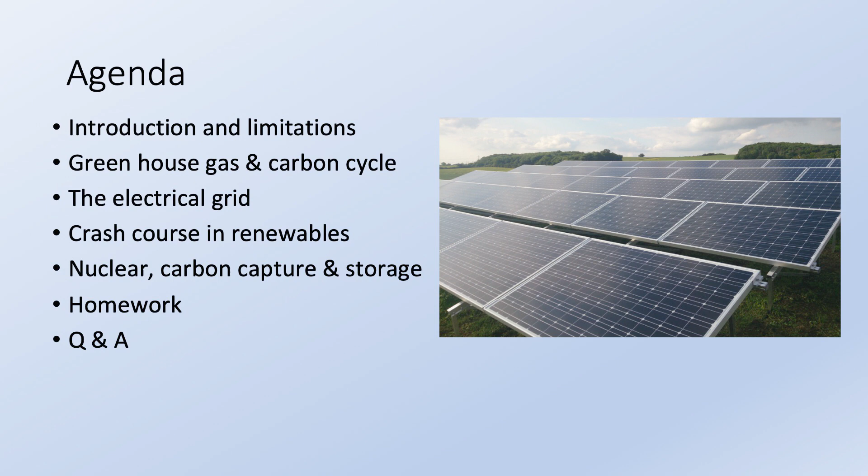So tonight we're going to have an introduction. I'll go through limitations, talk about the greenhouse cycle. We'll have a crash course in renewable energy, all the different types, the main types. We'll talk about nuclear, carbon capture and storage very briefly, and we'll have a Q&A at the end. The main three areas I'll talk a lot more about are going to be solar photovoltaic. It's going to be one of the main technologies in this country and around the world. Also wind. So wind is going to be one of the main technologies, it already is in this country. So I'll talk a lot more about that. And some of the other ones I'm just going to skim through very quickly.

Just to give you a little bit of an idea of my background. I was a surveyor, and about 2004, 2005, I was doing stuff with Friends of the Earth, and I went to the Big Ask campaign, and it was to get the British government to declare a climate emergency. And going to these talks was very influential, and I realised then that the work I was doing, getting people to voluntarily switch off lights, wasn't actually going to be enough, and that the whole world needs to go renewable. So I left my job and started working for a company doing heat pumps.

I realised all the people I was working with didn't actually understand the technology, so I went back to college. I did a master's. It nearly killed me. It was very technical, a lot of engineering, and a lot of things I didn't really understand. I went from a very soft subject to a very hard subject, and I set up a company, and I've worked in solar for several years in the United Kingdom till the British government decided to get rid of all subsidies for solar, subsidies for onshore wind. They closed down Warm Front. There's loads of different things that happened. I won't go into it.

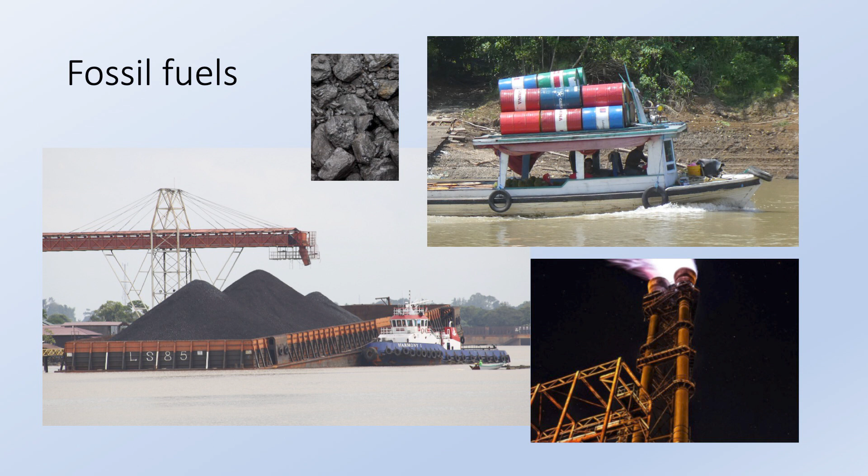These are lovely fossil fuels: coal, oil, gas. Different fuels that you hear of that are fossil fuels will all relate back to one form or the other. What's the problem? Well, the emissions from fossil fuels are literally skyrocketing. We are addicted to hydrocarbons.

The amount of energy that they give us has created the society that we live in. It's created the houses that we have, the cars that we drive. Everything that we've got is owed to hydrocarbons, and we're now understanding the actual costs and the problem of burning fossil fuels. So what we need to do is greatly reduce fossil fuel to pretty much zero. This is the pain that we have to go through.

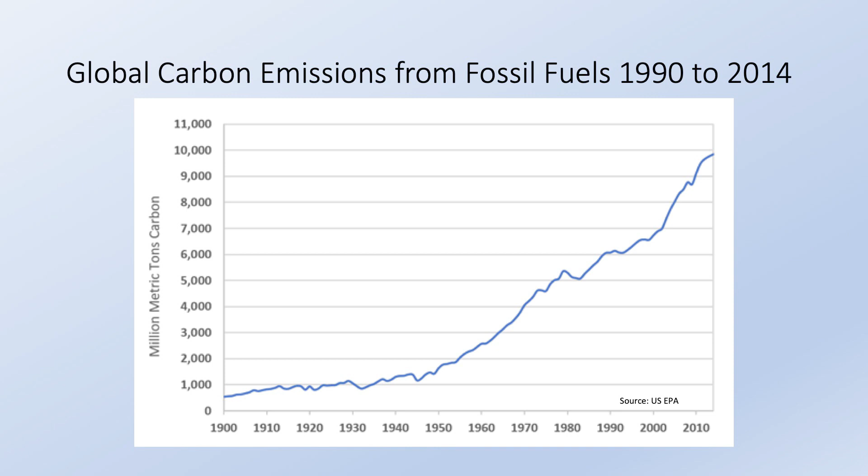We can actually measure in the atmosphere exactly how much carbon dioxide, CO2, is in the atmosphere. We're at now, I think, 416 parts per million. This is like nearly double what it was. CO2 has been constant in the atmosphere for about 3 million years. We know that from taking ice samples, and you can see exactly how much carbon was in the atmosphere.

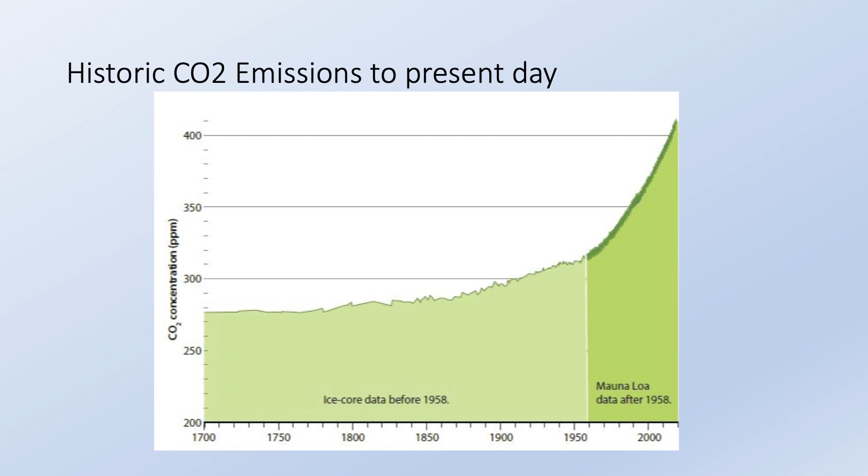And then you can see, trundling along, we hit boom times, we get really good at extraction methods, population explosion, and all of a sudden, it's going through the roof. Not only CO2, but also methane is rising as well, and also F-gases are rising. A quick crash course in the carbon cycle. We've got 2 different carbon cycles: the long carbon cycle and the short carbon cycle.

So the long one is where coal, oil, gas come from, and it can take hundreds of millions of years for coal to form. Over millions of years, it gets sucked out of the atmosphere through trees, all different forms of life, and through millions of years, it compresses and forms fossil fuels. That's why it's called fossil fuels. So what we're doing is we're extracting the fossil fuels and releasing them into our short-term carbon cycle, which is over here.

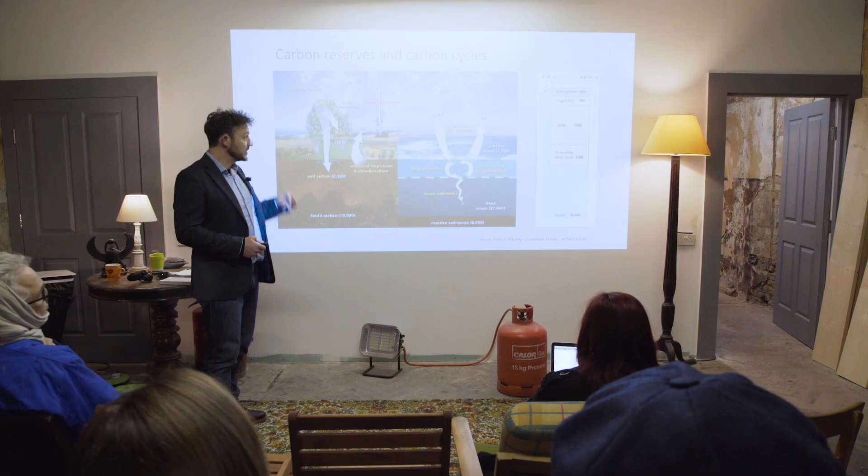So we can measure exactly how much carbon dioxide is in different places. And what's happening is we're upsetting the balance. When we burn fossil fuels, we burn carbon, it goes into the atmosphere, and naturally the oceans, the soils and the forests absorb a vast amount of it, and then there's a little bit left over, and that's what gives us the 416 parts per million. It's increasing ever so slightly to a devastating effect.

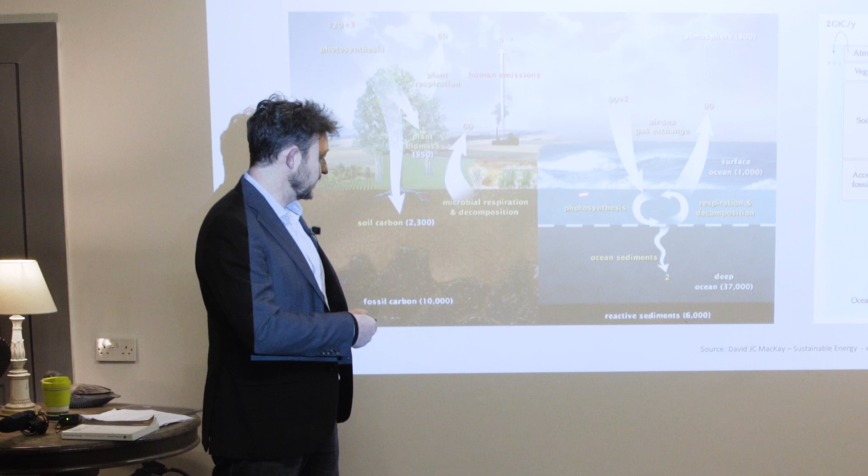Whatever's in the atmosphere, we have this area just here, the near surface of the sea, where it actually balances. So there's a slow cycle that will actually catch up. If you have 416 parts per million, a similar amount ends up here in the near surface. Then in the deep parts of the ocean, it takes hundreds and hundreds of years to filter down. So it's almost like a concrete barrier that it can't go through. And we, as humans, have now upset this natural cycle.

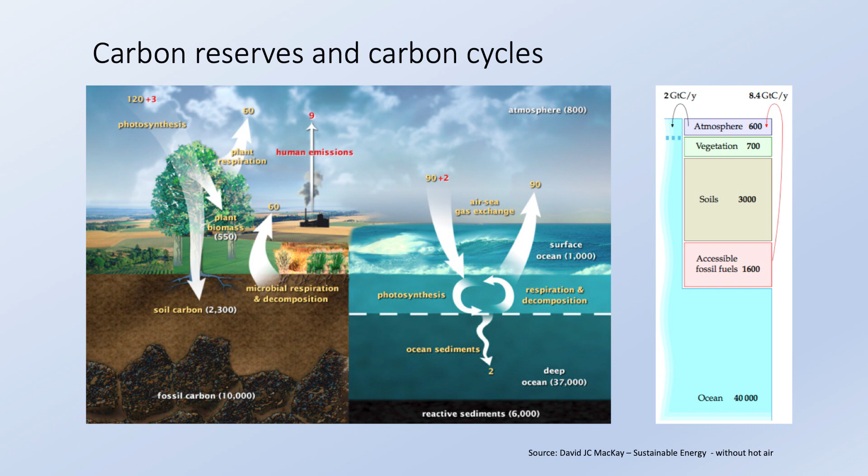So this is why not only do we have to stop burning fossil fuels, we have to figure out ways of decreasing the amount that's actually in the atmosphere. At the moment, our annual emissions, including methane and the other greenhouse gases, are 52 gigatons a year. We could be even increasing it at today's rate. We need to halve it in the next 10 years.

And by mid-century, we have to have totally stopped burning and extracting all forms of fossil fuels. So this is where we need to get to, and this is where we are. The question is, how are we actually going to do it? To give you an idea, at this moment in time, just 4% of the world's energy comes from renewable energy.

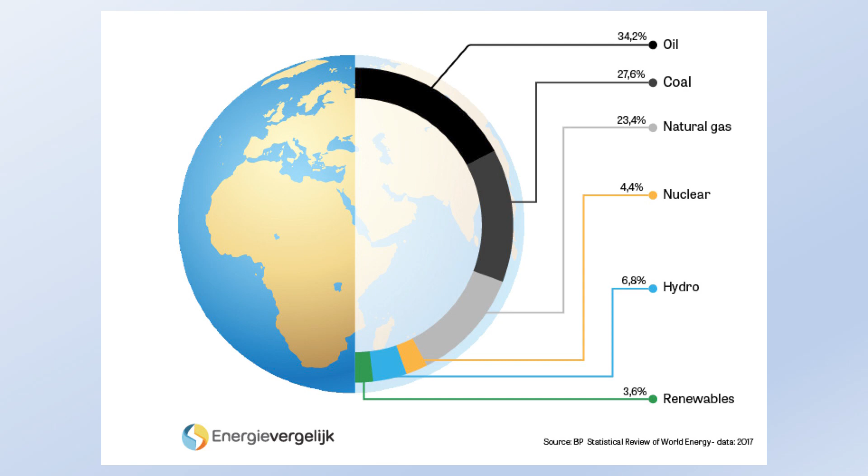We've got another nearly 7% from hydro. It's accounted differently to renewables. It is still renewable energy, but it's counted differently. So if you add this and renewables together and nuclear, it's about 14-15% of the world's total energy demand. So we've got a huge amount of work to do, like an absolutely colossal amount of work. It's just, yeah, it's a little bit scary really.

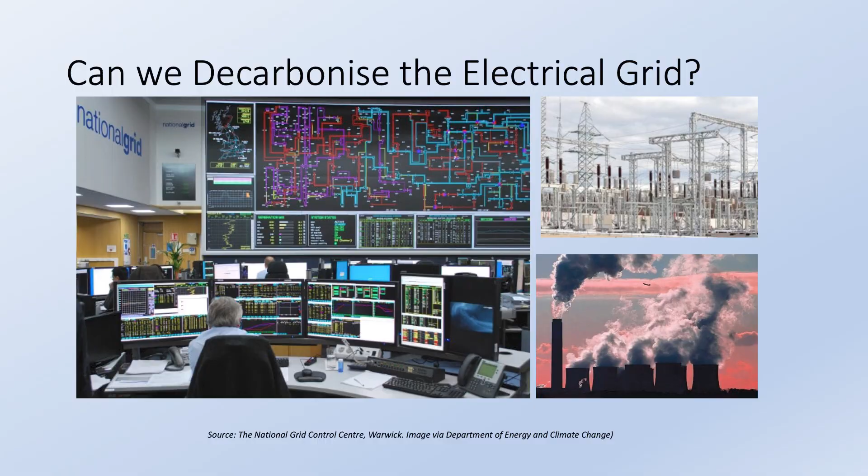So today's talk, I'm focusing on one part of it, which is decarbonising the grid, and it's decarbonising the electrical grid. So we've got several different types of grids. In this country we've got a gas grid where we heat our homes, and we have the electrical grid. All right, so this is a picture of the control room that you have in the National Grid Centre. It's highly complex. You're going to have a big energy source, like a nuclear power plant or a coal fired plant that produces vast amounts of energy.

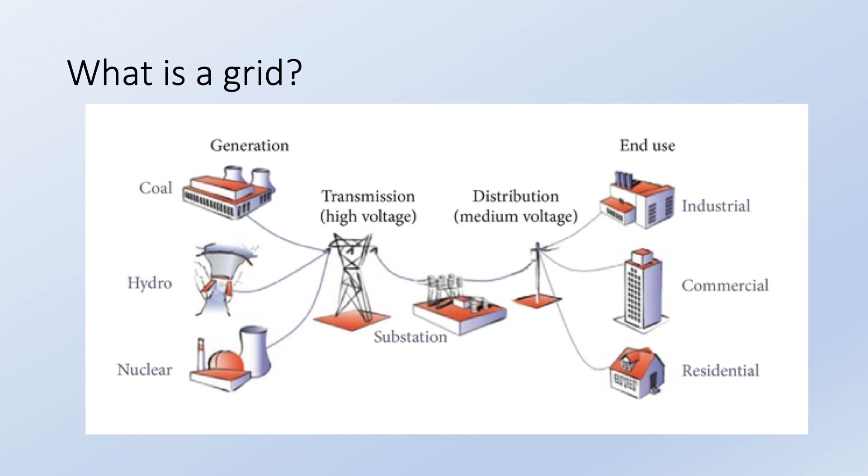Then you have substations, you have transformers that step up the electricity, they step down the electricity, they get it into high voltage so it can travel long distances, and then it gets to your DNO, your local distribution network, and it steps down again into a medium voltage, and then it steps down again into a voltage like 230 volts or 400 volts that you can use in factories and in your houses. So it goes through a process.

While it's going through this process, it uses a lot of energy at the start. There's a lot of wastage around this area. When the energy is getting transmitted, there's also more wastage. And then by the time it gets to us, there's even more wastage because we leave lights switched on. So the whole system itself has huge amounts of wastage to it.

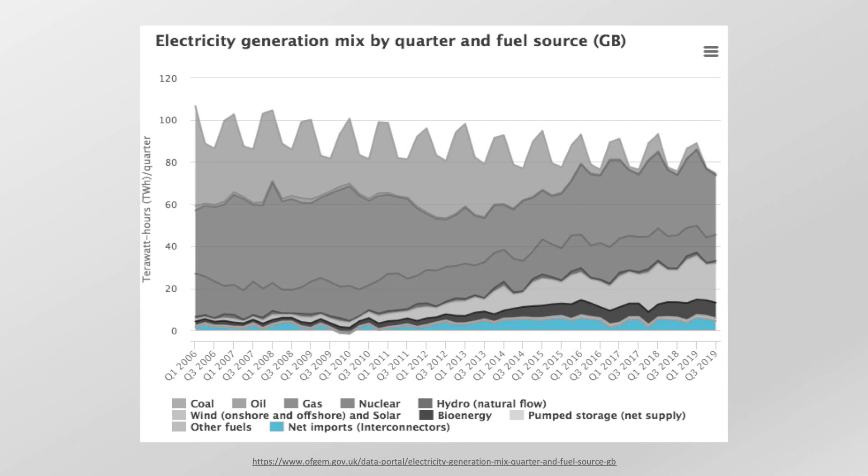And then we've got bioenergy, which is a little bit of a grey area, because a lot of bioenergy in this country is actually waste. So it's energy from waste, but it's counted as a form of energy. And we've got some pump storage, and then we've got interconnectors where we get electricity from France, from Ireland. We get to share the grid, so at peak times we get to have extra amounts of energy.

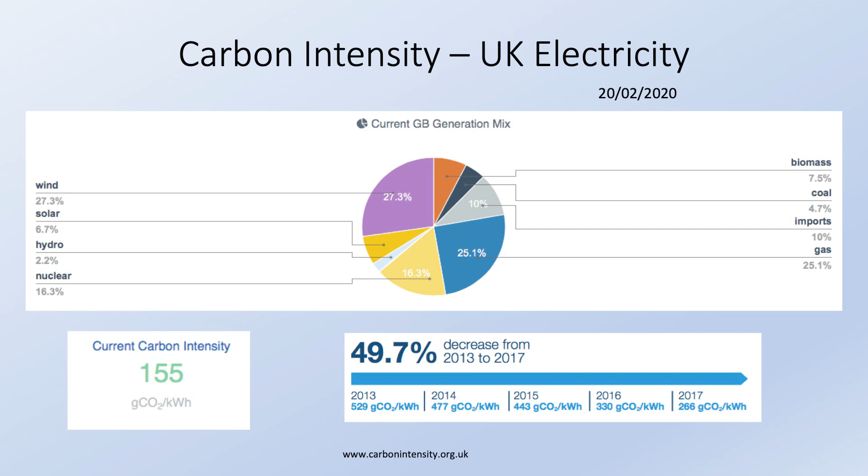Combining 27% and 6-7%, you've got like 34%, so over a third of our electrical grid today was being produced by renewable energy. That's quite good. We've got hydro topping us up a little, nuclear as a base load since it's very hard to switch nuclear plants on and off, some imports through interconnectors, and we've still got coal on our grid, which is quite dirty. The current carbon intensity was 155 grams per kilowatt hour compared to 203, so you can see it varies quite a lot.

You can see we're heading in the right direction for renewable energy, but we're not getting there quick enough. Now I'm going to talk about the different types of renewables. Renewable energy is energy generated by natural resources that can replenish itself quickly, meaning within our lifetime. Some fossil fuels are quick growing, like peat bog.

Peat bog can grow in a couple of hundred years and absorbs lots of carbon. If you burn that, you're not going to hang around waiting a couple of hundred years to replace it.

So the main types we've got are three main sources. We've got this huge ball in the sky called the sun that emits vast amounts of solar radiance. Most of the renewable energy we have comes from the sun.

The other type is geothermal energy, which comes from the core of the Earth. When the Earth was formed 4.5 billion years ago, there were lots of mini nuclear reactors still going on inside it, so you've got all this heat in the crust.

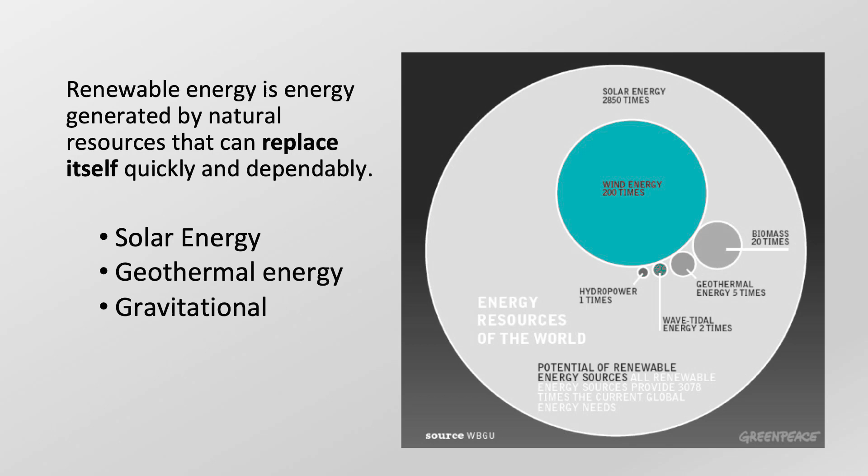And then we get onto wind. There's enough wind to give us 200 times more energy than the whole world needs, which is quite phenomenal. And then we get to solar energy, and we're at 2,850 times.

So within about an hour of solar radiance hitting the Earth, if we could harness that, we could power the whole world. So that's the power of the sun.

The main types we've got are direct solar energy. You've heard of solar panels — that's solar photovoltaic. Solar thermal is also direct energy from the sun, used to heat up hot water. Passive solar is when you've got a nice big south-facing window, and naturally the solar energy will just heat up the room.

Indirect solar energy includes hydropower. What happens is the sun heats up water, the water evaporates, goes over a mountain, cools down, rains, forms a river, flows down, you put a dam up, and then you generate energy from that.

You've also got wind power, which is indirect. The sun heats up the water and the land, creating temperature differences, so cold air moves into warm air, creating a big cycle which generates all the wind. Bioenergy is also from the sun — through photosynthesis, plants grow, you chop the plants and burn them, so that's indirect too.

And then we have the non-solar renewables, deep geothermal, when you go into the core of the Earth and harness the heat from there, and tidal energy.

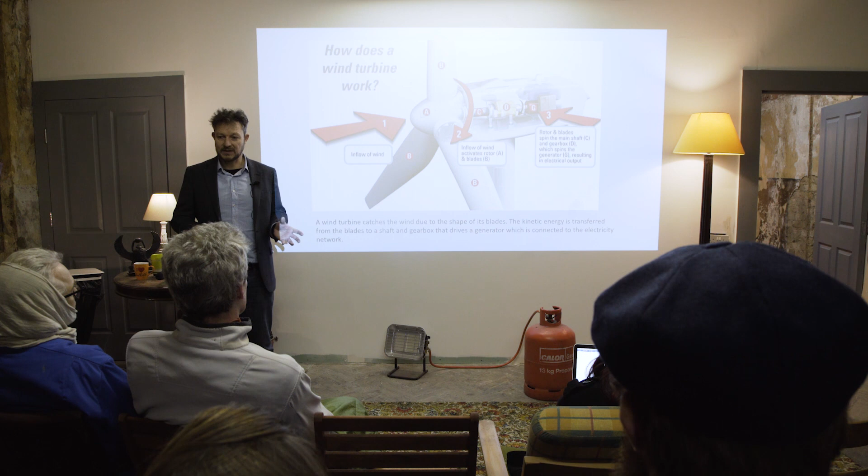How does it work? It works through kinetic energy. We've got now a standard wind turbine: you have a vertical post coming up, with a generator on top, and the standard design now uses 3 blades.

Throughout history, we've had lots of different prototypes, lots of different types of wind machines. We've had ones with 2 blades, ones with 5 blades, ones that have been bladeless, and ones that are curved and can go onto the side of buildings. But pretty much now the standard design going up everywhere is 3 blades, attached to a generator, with a gearbox in between.

The blades are going around between 10 to 20 times a minute. By the time it gets into your generator, this has gone up to about 1,500 to 2,000 revs per minute, spinning like crazy to generate electricity.

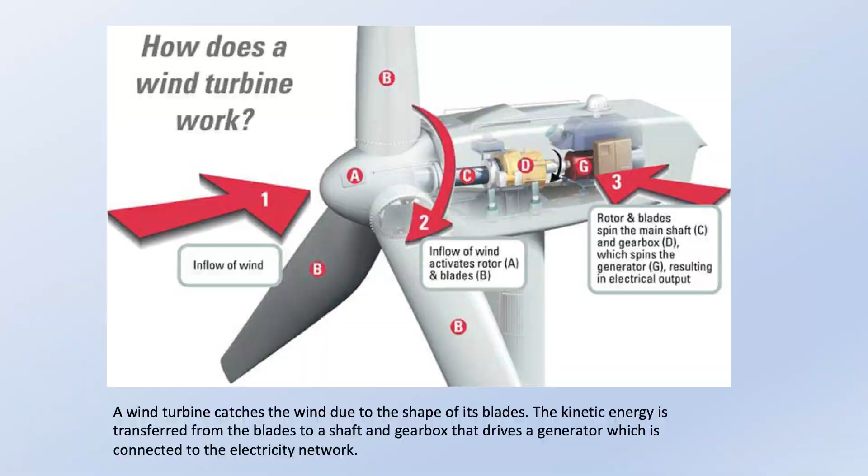What you've also got is a little wind dial at the top that measures the wind speed, so it has to wait for a certain wind speed for the turbine to start working. The modern turbines we have now are actually so large that they draw energy from the grid to start, because of the weight, and they'll start spinning to get up to speed before the wind takes over.

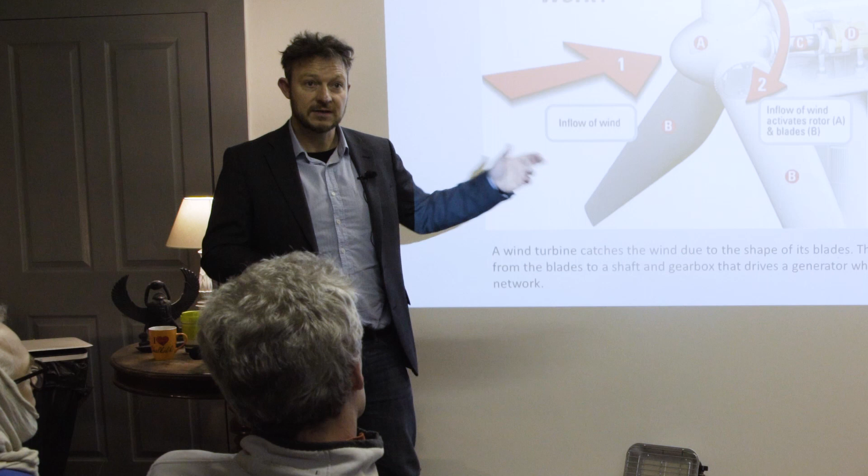What you have is the wind hitting the blade, creating positive and negative pressure. So when the wind turbine is going around, the blades are actually flying like an airplane wing. Positive, negative, you've got some lift going on, and that's the kinetic energy.

Here in the UK is the world leader in offshore wind. The largest wind farm in the world is the London Array. There's another one that's just gone up in the north of England, which is slightly bigger, and there are plans for even more.

To give you an idea of how large the wind turbine blades are going, they're now up to 107 meters in length. They're getting bigger because the bigger the wind turbine, the more energy it catches, and it works on a cubed law: if you double the size of a wind turbine, you quadruple the output. It's also more efficient for the gear levers and cheaper for the cables. Economies of scale - bigger is better.

Offshore wind also gets much smoother wind, so you get better wind quality and better wind speeds. In this country, they like offshore wind because you get fewer people complaining about them. To give you an idea of offshore wind turbine sizes, years ago when I was doing this in Germany, we were looking at 6 megawatt Siemens turbines.

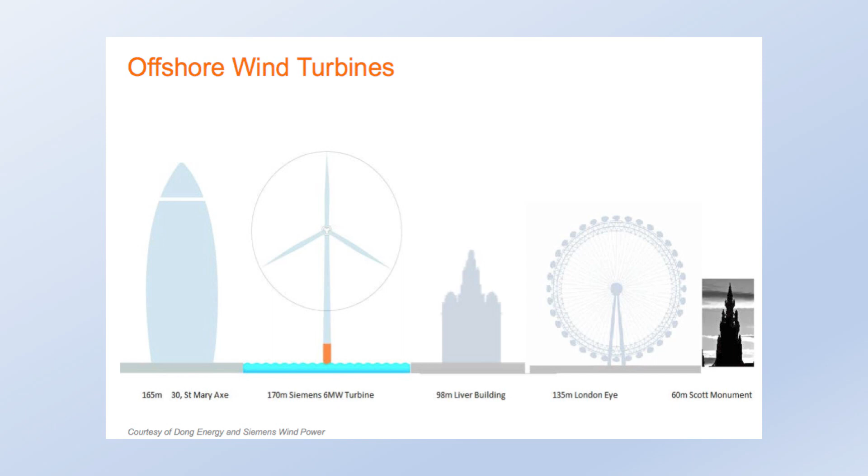They're bigger span than the London Eye. More recently, it's gone from 6 megawatts to 12 megawatts. This is being built in Holland, and you can see here it's not shy of the height of the Eiffel Tower. So between the size of the London Eye and the Eiffel Tower, you got one of these turbines.

Its capacity factor is a lot greater because it can actually work in lower wind speeds, so you actually get more energy from the wind.

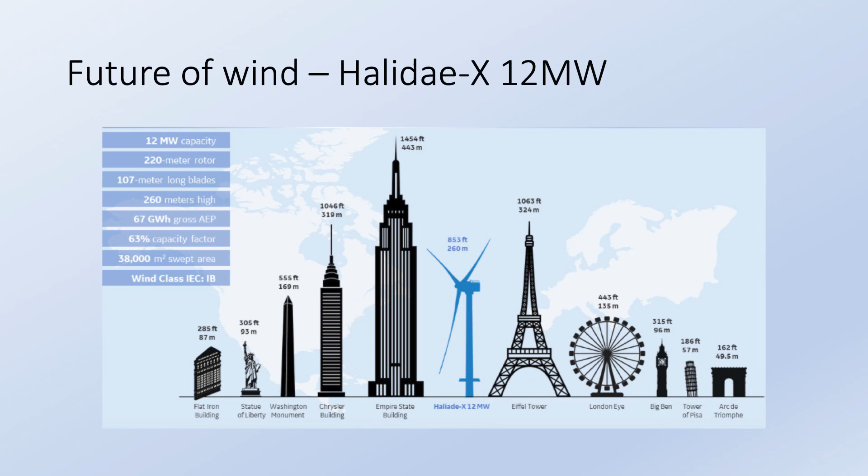The blades themselves on these ones are 107 meters long. They have to have a special coating on them, because the problem is when rain hits them, it hits them at such a speed with the blades going up that they have a special coating on them. And the blades themselves, it takes about 240 people to make one blade.

So this is currently being built, and one turbine is enough energy for 16,000 houses.

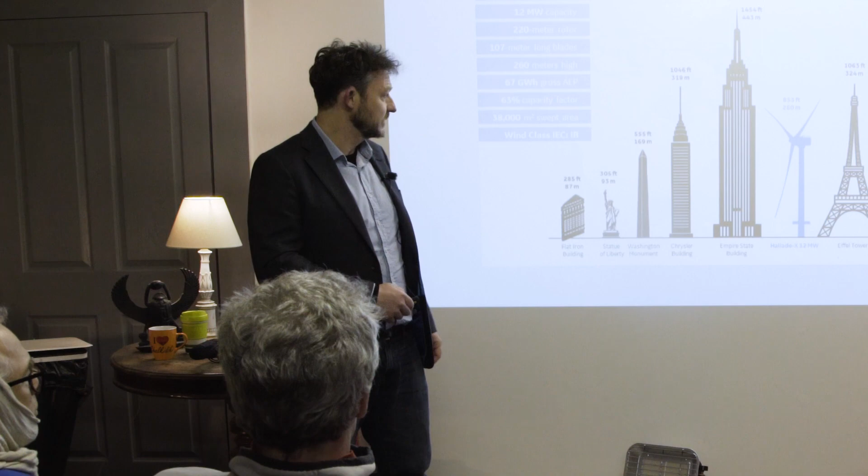More things coming into the future: we're going to have floating wind turbines. The first floating wind turbine farm opened in Scotland last year. It's got 6 turbines. The beauty about floating wind is as you get deeper into the ocean, you need to have more steel, more concrete, more cables, and more costs for actually constructing them.

And then if there's a problem, you have to send a big ship out to try and fix it, which costs a lot of money. If you've got a floating wind turbine, what you do is you unhook it from the seabed, get a ship, bring it back to shore, repair it, and bring it back out again. So floating wind turbines is something in the future that we can see quite a lot more of.

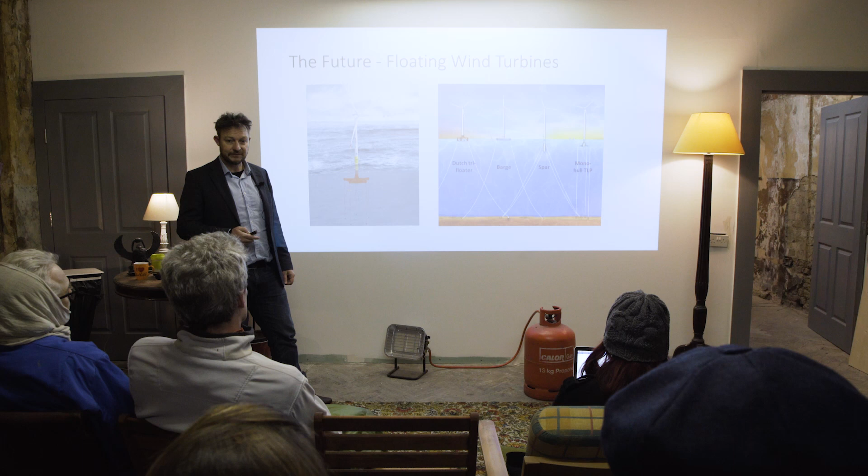We've got different designs going on. A lot of them are based on oil platforms for balancing in the sea. In the North Sea, we've got absolutely grand plans for actually even building an artificial island, with interconnectors between Holland, Norway, UK, France, Belgium, all going together to different countries.

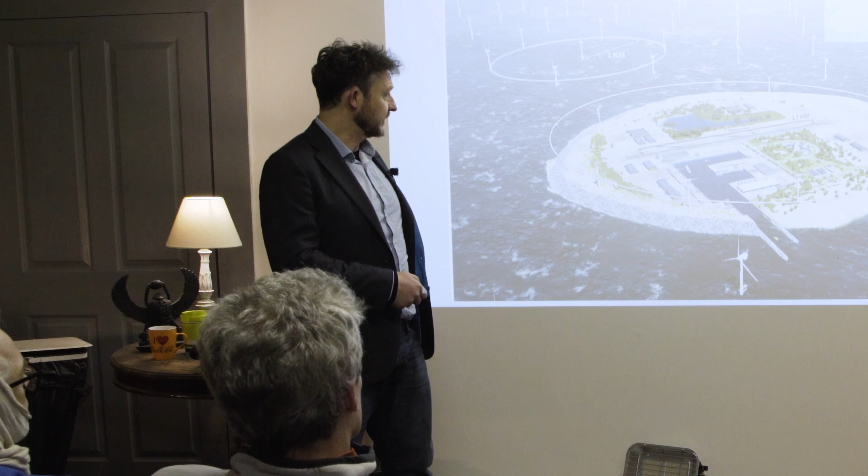The whole idea is to bring the cost down even more. You have a centralized place for all the wind turbines' energy to go, and it brings the cost down. And again, you've also got maintenance for the ships to come in and out, and the workers that can actually live on an island like this.

With the wind potential in the world being enough to power the whole world 200 times over, it is possible. We have the engineering solutions to it. Countries are working very hard on it. Several things we do have to overcome, but they are happening. And it's quite an exciting thing to see.

In this country, again, they got rid of onshore wind. There's people complaining about them. If you've ever heard the term NIMBYs, not in my back yard - people not liking the sight of wind turbines pretty much killed onshore wind, which is a shame because onshore wind is probably about half the price of offshore wind.

Summary, advantages: wind is never going to run out. It's cheap. It provides a lot of jobs, continuous jobs. It stops the reliance on imported energy into the country. And also it's actually a very efficient use of space. If you use wind turbines on land, you can actually still have sheep and farms underneath. It doesn't actually interfere, and you can even have a forest underneath. So wind turbines don't upset land use at all.

Biggest disadvantage to wind is it's an intermittent supply of energy. Over Christmas, over winter periods, you get a lot more wind than you do in the summer. You get more wind at night than during the day. But wind doesn't blow 24 hours a day, so it's an intermittent supply. We can work out an average over a year, or over 10 years, how much energy we get, so we know how much we will expect to generate over 1 year, 5 year, 10 year periods. We can work that out pretty accurately using wind data and wind charts, and they've got wind atlases that tell you how much wind blows in different places. But it is intermittent, so it has to be balanced.

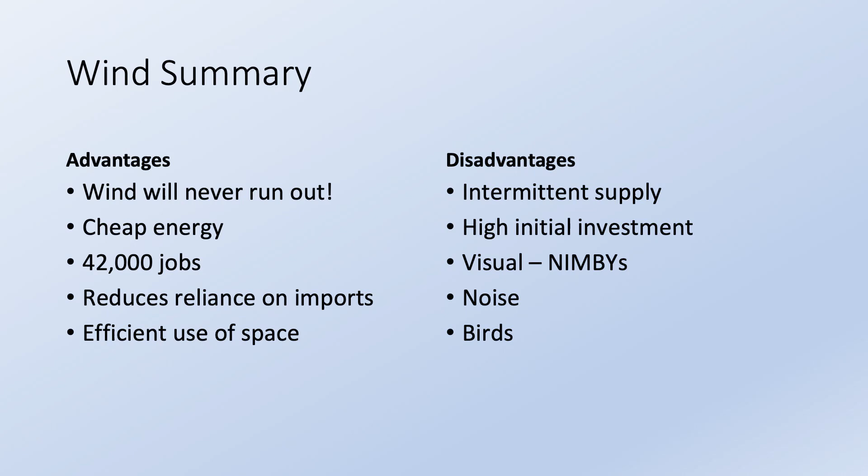There is a problem with birds, but surprisingly, the amount of birds killed by turbines compared to birds killed by cars is outnumbered, something like 50 to 1. So there aren't actually as many birds killed by wind turbines as people think. When designing a wind farm, onshore or offshore, you have to do a study to check where birds migrate, so you won't put a wind farm where there's going to be birds going across.

Silicon is the main ingredient for solar at the moment, which comes from sand, the second most abundant substance in the world. You heat it to a very high temperature and form crystals. Then, over a very slow process, you cut the crystals using almost like a form of thread - it takes about 24 hours to cut one solar cell. Each solar cell is thinner than a human hair. I've got a little sample here you can look at - you can't see exactly how thin it is, but they come in all different shapes and sizes.

Historically, the solar we've got now first came to commercial use in, I think, 1956. It was a 1 watt solar panel used in space to power a radio. NASA and space development have actually been driving modern day solar. Historically, solar has been used by the Chinese and different places around the world for reflecting the sun's power to light fires - that was the first use of solar, known as concentrated solar.

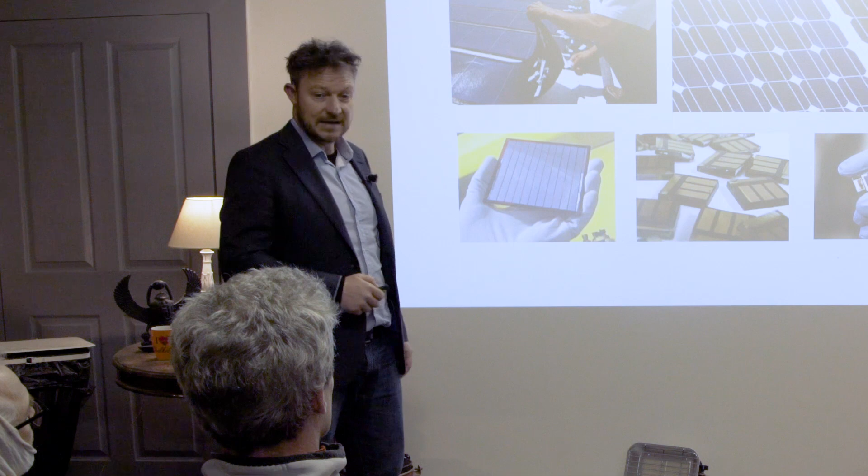Solar technology is exploding - we've got organic solar panels now, and ones that use thin film and monocrystal together, forming a plate to increase efficiency. These ones here are monocrystalline - you can tell they're mono because they're black - and these are polycrystalline. About 95 to 97% of all solar panels you see in the world are going to be one of these two types, and these are the standards. From here, they break down into different variations.

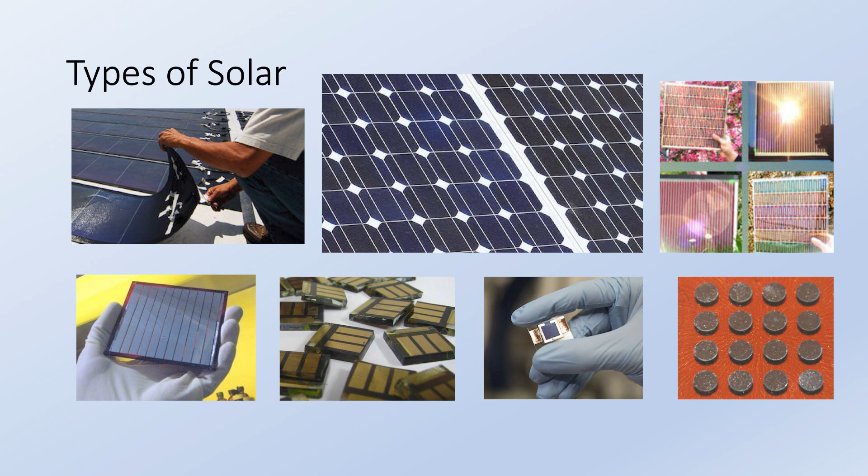We've got bifacial panels that can actually use energy from the backside, from the reflection of the albedo effect on the ground - you can combine them. You've got these ones here, this is thin film, about 100 times thinner than the ones I was just passing around. You've got ones now you can actually print, and you can get dye-sensitized solar cells too.

You can get solar materials you can actually manufacture into clothes. You've got ones that are clear. You can have glass that actually can be a giant solar panel, and you can get paneling that looks like metallic paneling, so the whole building can be solar.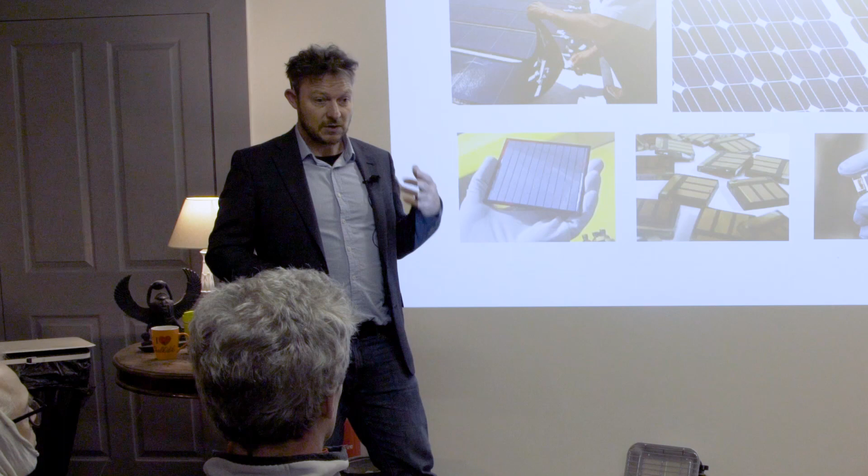Solar is the future, and there are so many developments happening in solar that the price is tumbling every year. Even the projects we're working on at the moment, we put in a quote for a system, and six months later we have to update it because we've been given cheaper, more efficient solar panels from the same manufacturers, now up to 390 watt. When I was installing solar, the first panels we used were 190, 200 watt. So they've nearly doubled in size, the efficiency's gotten better, and they've gotten cheaper every year. The price is just tumbling down.

To give you an idea, since 1977, the earliest example I could find, you're talking about $76 per watt - watt being the unit you measure solar in. By 2015 it's down to 30 cents a watt. So if you work that out, it's about 99.99% cheaper than it was decades ago. The price is just absolutely tumbling.

When I was doing solar, we had the feed-in tariff, which was meant to incentivize people to put solar onto domestic properties, commercial properties, schools, etc. The government kept decreasing it, got the pricing wrong a couple of times, and it crashed the whole industry. But now, for the first time ever, they've had the first unsubsidized solar park go in in the UK. That means the price of electricity produced by solar is cheaper than fossil fuels, which is a game changer. We could see solar becoming the most dominant form of energy in probably about three-quarters of the countries in the world that have higher solar radiance, and it's happening. All we have to do now is figure out clever ways of storing it, with battery storage systems.

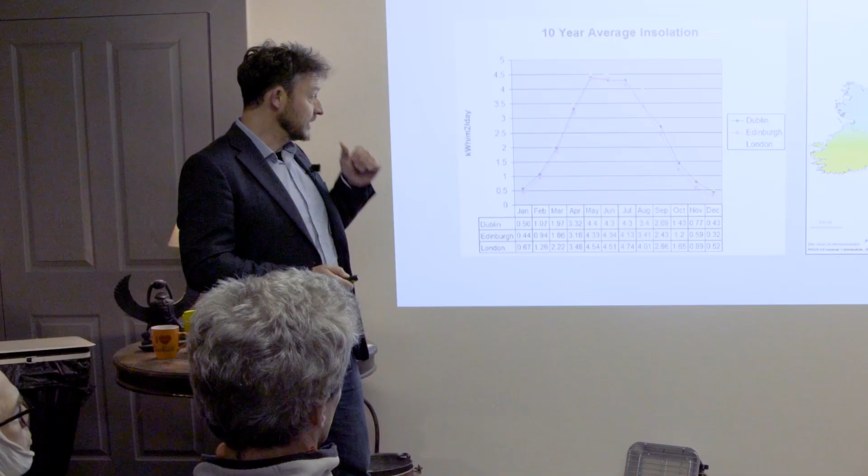What you can do is over-spec the roof so you produce a bit more excess energy in summer, which will flatten out the curve a little. Instead of south-facing panels, you can have east-west facing panels, which will balance the system a lot better. Then if you have a battery system, you can store some of the energy during the day and use it at night to run your television and lights.

A typical system is a house in North London with 12 solar panels, 300 watts each. You can see the solar panels on top - they sit on a mounting system, with DC, direct current, cables coming down from it.

You have a safety switch, isolators, and it goes into the heart of the machine, which is an inverter. So the inverter is the only part of the solar PV system that has any kind of moving parts as such. It has a function. The solar panels themselves are giant semiconductors. They don't actually do anything. There's nothing for them to break. But the inverter, you can expect maybe to change it once every 10 years.

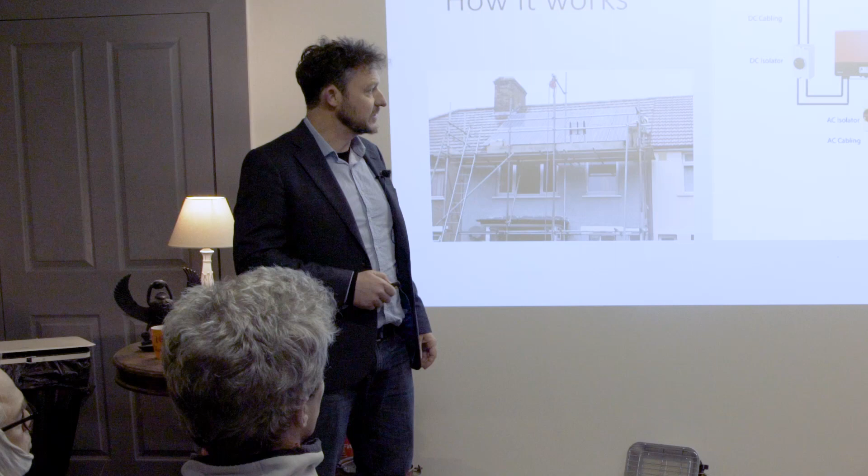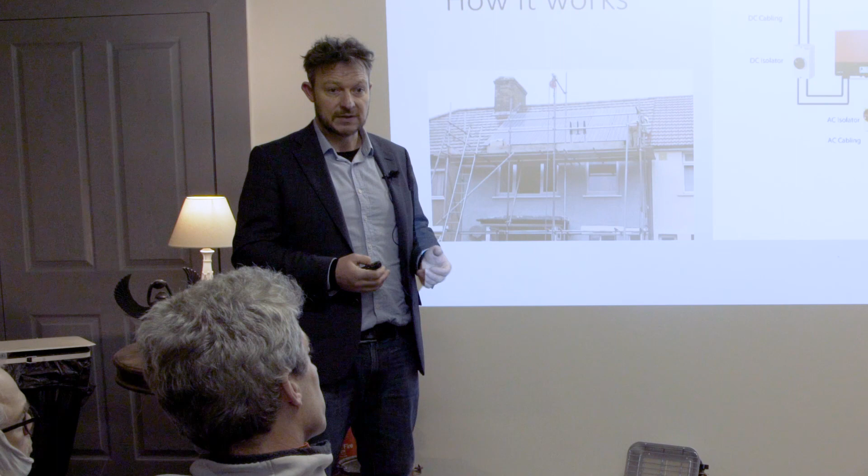And it changes from DC, direct current, into AC, alternating current, and it gets the harmonic frequency. So it gets the frequencies the same. Then it goes into here, the consumer unit, and then you get to use it in your house. Any excess energy goes into the grid.

Future, we've got now concentrated CSP, which is you have literally thousands of mirrors, and what it does, it super concentrates all the sun into one area, into here, to thousands or so degrees. You've got pipes going up and down here to create a vast amount of steam that powers a generator. You can also store the heat from this in molten salts. So then at night you can use the heat to generate more steam to run your turbines, and you can run them 24 hours.

So concentrated CSP gets a way higher output for land use. So what we could be doing in the future would be having CSP units in the Sahara Desert, and then having high voltage DC cabling going to different parts of Europe and the supergrid, and you could actually link everything together, with everything naturally balancing the system.

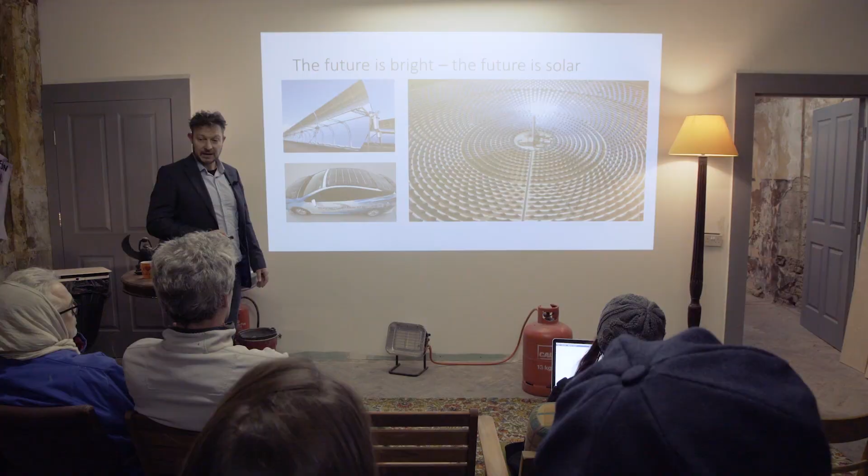This is possible. They're starting to make more concentrated solar plants in different parts of the world, and they actually look amazing as well to see. So this one is in Seville. So if you're ever in Seville, you'll be close to where this is. But you need to have them in very sunny areas. One problem is if a bird gets near it, they actually just fry, they just evaporate because the heat's so high. Parabolic units, what they have is a glycol solution going in here. It gets superheated, and this then goes and drives the turbine. Something similar to this. They use quite a lot of these in the States.

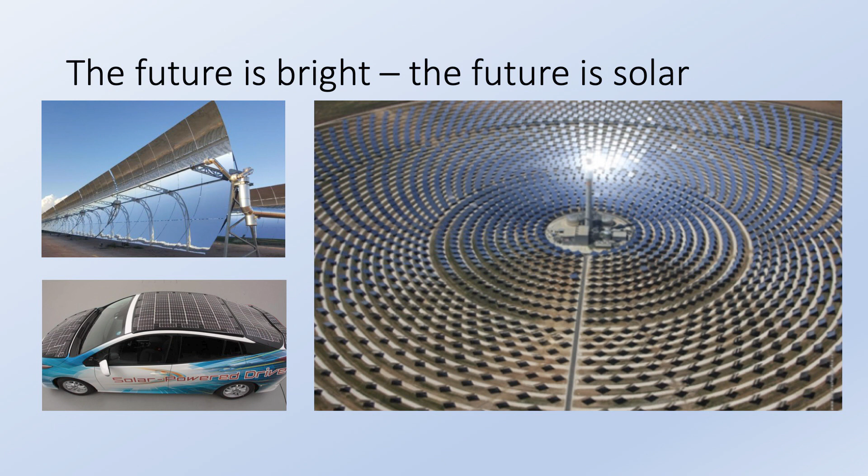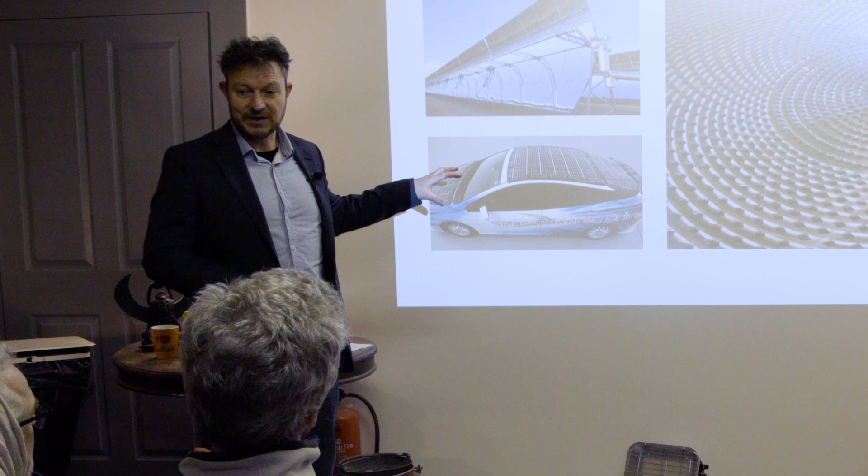We're now moving towards electric vehicles. You can actually have a solar powered car. This is a prototype. If you only drive it about half an hour a day, you can actually get all your energy without even having to plug it in. Technology is moving along very, very quick with solar.

This is a house that we did in Cambridge. It's a zero carbon house. It's got half meter thick walls. We combined an air source heat pump with 10 kilowatts of solar, so 40 solar panels. This building produces enough energy per year, you work out the balance, to run an air source heat pump that heats the whole house. It heats the swimming pool, all the lights. So when you work out the energy balance, it doesn't actually require any energy to run it. It's still connected to the mains grid for winter time. This is where we need to move.

Actually, I wouldn't mind moving here. It's quite a nice house.

Solar panels. We are going to have tens of millions of spent solar panels in the coming years. By 2050, I think about 10% of all the e-waste in the world is going to be solar panels. Knowing that we're going to be dealing with solar waste, we need to be putting in plants to recycle them, and they can be recycled. You have to physically break them down into different components.

Most of the component that goes into a solar panel is glass or glass type. There's a lot of polymers, a lot of plastic goes into it that can be used for waste energy. The copper can be recycled. The silicon itself is about 6-8% of a solar panel. That can be broken down and reformed into making new solar panels. But we need to get the facilities in place.

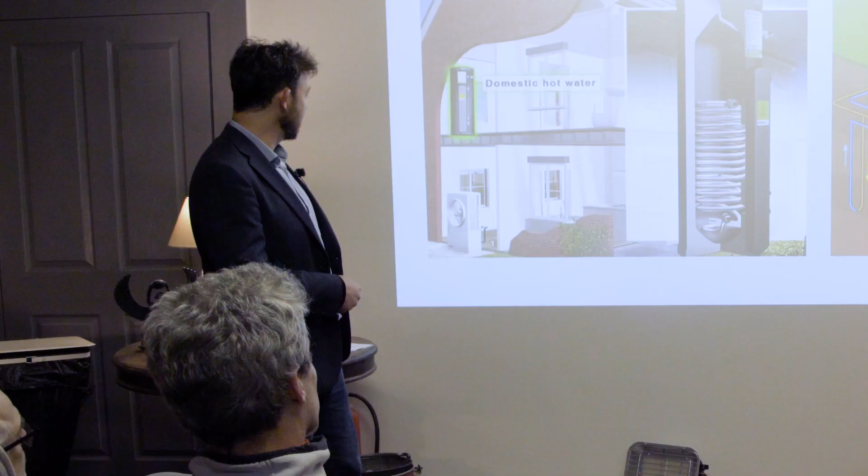And collectors, you've got horizontal, they just go forward and back. You've got slinky, they're kind of in loops. You've got water, you can actually go into a pond, which actually works a lot better, and you've got open loop. And this here is an air source heat pump. It actually gets the energy from the air. So it works on the same principle, but it actually sucks air in, and that's where it gets its latent heat.

So how it works is always very hard to explain. Everybody here probably has a heat pump in their house. It's a fridge. So you stick something into a fridge nice and warm, you close it, you come back several hours later, you open it, you take it out, and hey presto, it's cold. So it's a magic box as well.

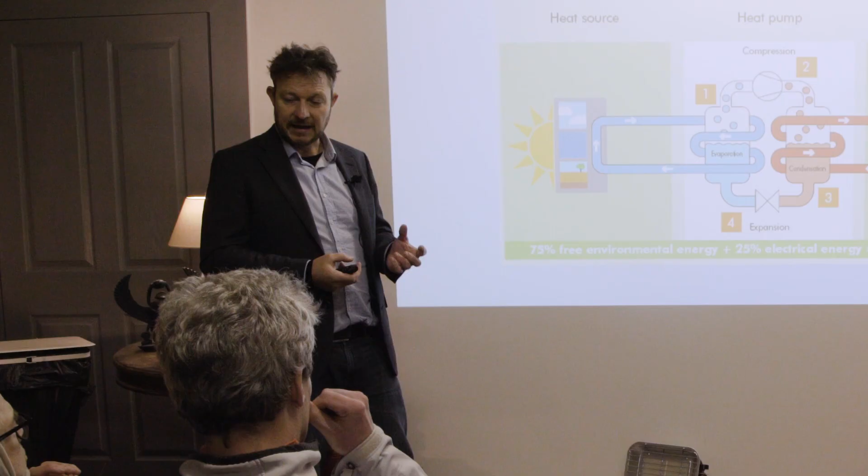How it works, you've got your collectors here, your ground source, water source, and air source collectors, which is this bit here. So it goes out into the environment, it collects a couple of degrees of heat from the air, from water, and then it comes back into the heat pump itself, and it comes in contact with a refrigerant gas, and the refrigerant gas has a boiling temperature of about -27 degrees.

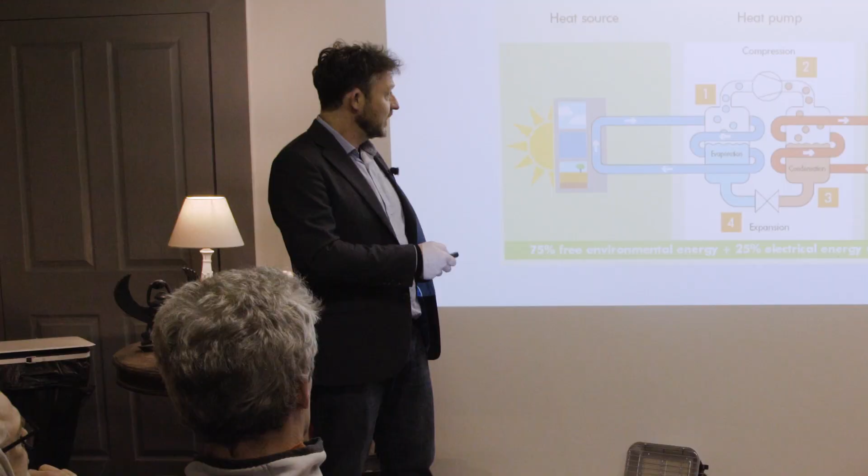And so when it comes in contact, you get a transfer of heat from this loop here, and it goes into the evaporator. When the refrigerant gas heats up from -27, its boiling point, it turns from a liquid into a gas. So you've transferred the energy into the gas, and it goes into a compressor. You need electricity to run the compressor. It spins around and it compresses the gas, and when it compresses the gas, it heats up.

So it's like if you go on a cold day and you get a bicycle pump and you're pumping air, and next thing your hand starts getting warm. So it's Boyle's law. As a gas compresses, it actually heats up, and it heats up to 60, 70 degrees depending on the type of heat pump and depending on the refrigerant gas.

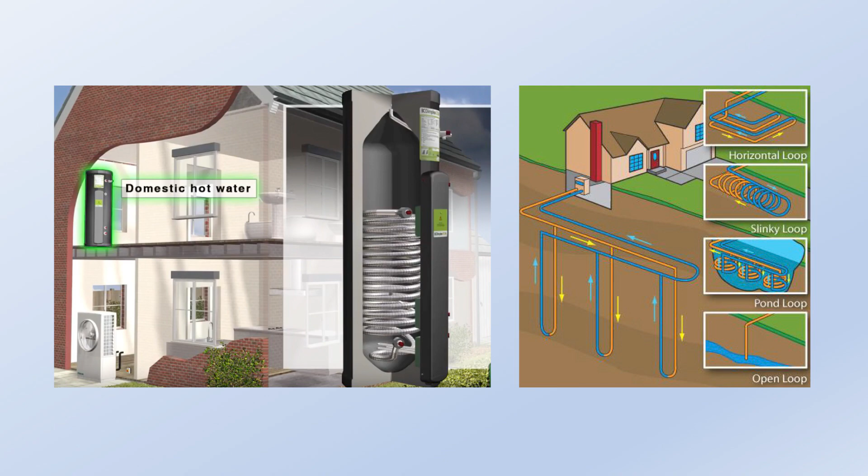Then it goes into a condenser. It expels the heat, so it goes into another heat exchanger. So this part here is a heat exchanger, and it exchanges the heat from the condenser into the distribution system. Going back one slide, that heat then ends up here in a nice big tank. And then your heat distribution system can be underfloor heating.

So if you've got a big area of underfloor heating, you'd have the heat coming out at about 35 Celsius, and then the returning temperature is about 27 Celsius. So it's very low grade heat. So what a heat pump is doing is moving low grade heat, compressing it, and then moving that compressed heat to a different place.

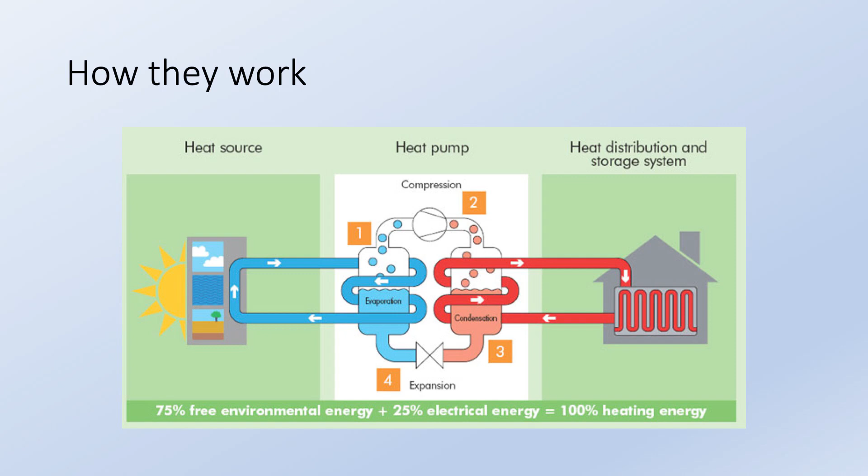So a heat pump is actually a heat transfer machine using refrigerant gases, very, very clever closed loop refrigerant gases. Once the latent heat's been given off, the refrigerant gas cools back down again. It goes into an expansion valve, which then puts it back into the evaporator, and then the cycle continues. So you've got this continuous cycle going on.

So the hard thing about heat pumps is getting the sizing right. If the size is too big, your heat pump is not going to be running very efficiently. If you've got it too small, it's not going to have enough heat to actually heat a building. And then to heat a building, it needs to have a certain amount of air tightness. So if you put a heat pump in here and you've got single glazed windows and a draft coming and going, a heat pump wouldn't be a very efficient way of heating a building like this.

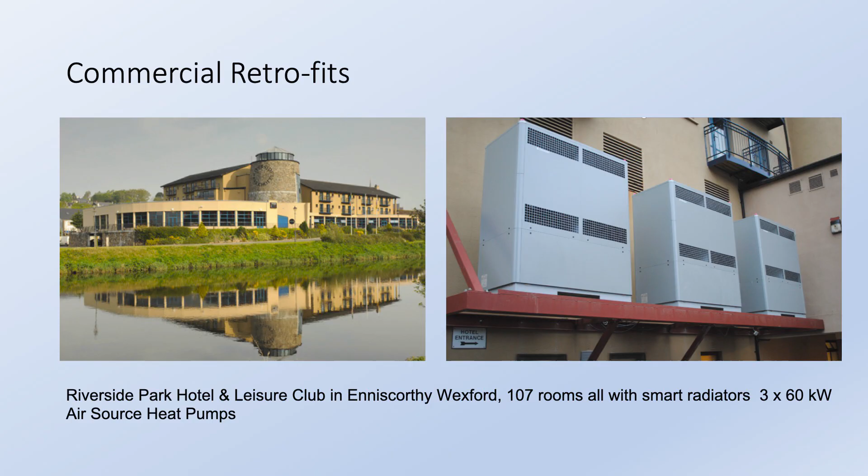So the first thing you need to do is increase the thermal insulation and increase the air tightness. You can retrofit, you can do large scale retrofits. This is a hotel in Wexford in Ireland. It's a 107 bedroom luxury hotel with a spa and swimming pool, and the whole place is run using three 60 kilowatt heat pumps. So you can keep on joining them together to get the energy that you need.

Then in the whole hotel, all the radiators were replaced with smart radiators. They're called smart rads, and they only use about 5% of the liquid that goes into a traditional radiator. And then you've got a fan at the back that gets the heat out of it, so you can get a radiator with like a 35, 40 degree flow temperature to heat a room. It's all very clever stuff.

To give you a comparison to what we're trying to change over from: gas boilers running on natural gas. We need to try and get off natural gas and get onto heat pumps. The problem with heat pumps is they're expensive. The actual units themselves cost a lot of money. To retrofit, you need to put in additional piping, a buffer tank, and a new type of cylinder. So this all costs money compared to a gas boiler.

Once you get a heat pump up and running, its running cost is quite low, because for every kilowatt of electrical energy you put into it, you get 3 to 4 kilowatts of heat energy out. So this is the magic part of a heat pump. The fuel is electricity versus gas. Maintenance, it's like a fridge. How often do you need to fix your fridge? Not very often. Whereas gas boilers break every 8 to 10 years and need to be serviced quite a lot.

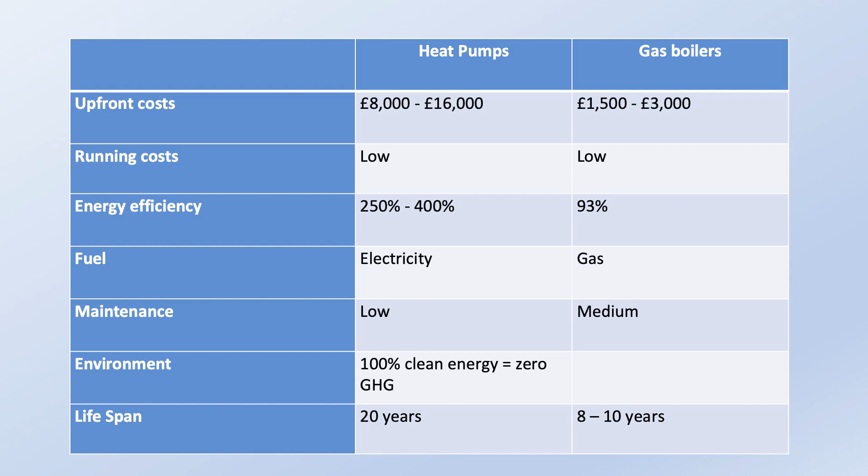If you get clean energy going into them, they're actually 100% carbon neutral. That's why we're relying on heat pumps to meet our future zero carbon Britain. That's air source, water source, ground source, and bivalent systems where we combine one or two technologies to get the best use out of them.

Some of the problems we've got: capital costs. Most buildings in the UK won't be suitable for them because they're not warm enough. They need to have their energy efficiency improved first. The design is a big problem. You can't just rip out a gas boiler and stick in a heat pump. You have to do heat loss calculations, which cost a lot of time and money.

There are limitations on the grid as well. If you put in a big commercial heat pump, it needs a certain amount of energy to get it started. So moving to the future, we're going to have to look at increasing the grid capacity for heat pumps and also for electric vehicles.

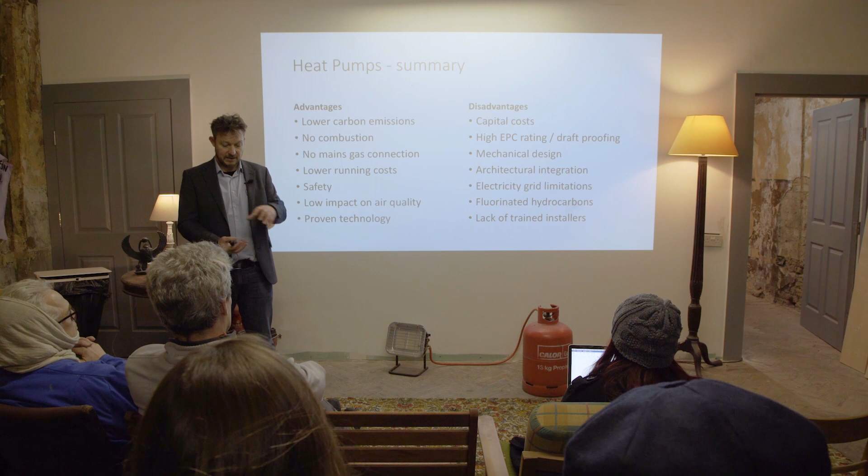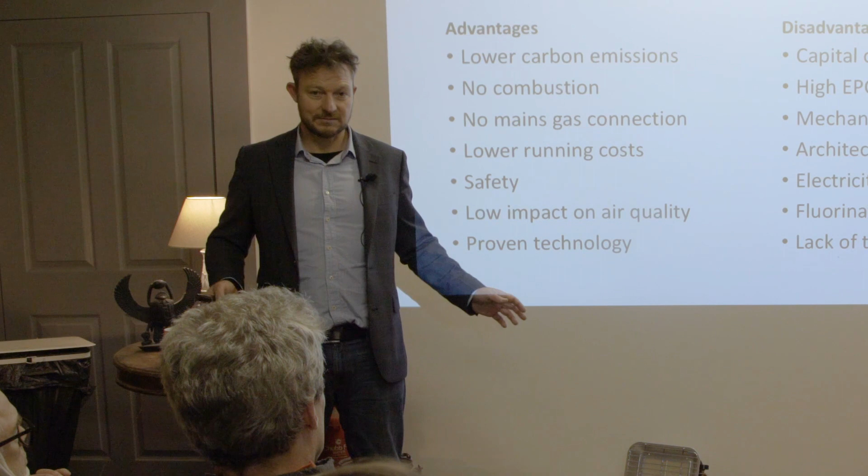Another big problem that most people don't know about is the F-gas that we talked about. Most heat pumps have a small amount of F-gas in them, which is 23,000 times more potent than CO2. If anything happens and it gets into the atmosphere, you've ruined the advantage of having a heat pump.

The other biggest problem we have is lack of trained installers. We've had subcontractors coming in who put buffer tanks on the outside, which means the heat pump's never going to work. We've gone to places where traditional plumbers have plumbed the system as you would radiators, and it's not going to work. So a lot of design and thought needs to go into them.

If you get it wrong with a ground source heat pump, it can extract so much energy from the ground that it actually physically freezes the ground. Get it wrong the other way, and you've got a machine that's not running very efficiently. But once it's up and running, there's no maintenance cost, they last a very long time, proven technology, they're very safe, and there's no combustion going on inside them.

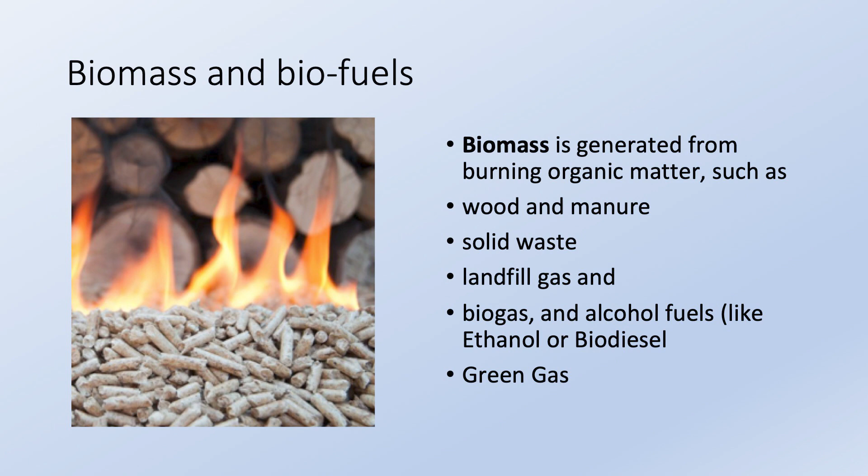Biofuels, biomass, biogas - we use a lot of these in this country. Solid waste, we burn rubbish, it's not a very good source of energy. We've also produced fuels from biogases as well. In the future, quite a lot of the UK energy mix is looking at using biogases and biofuels, so it's a technology we need to keep an eye on.

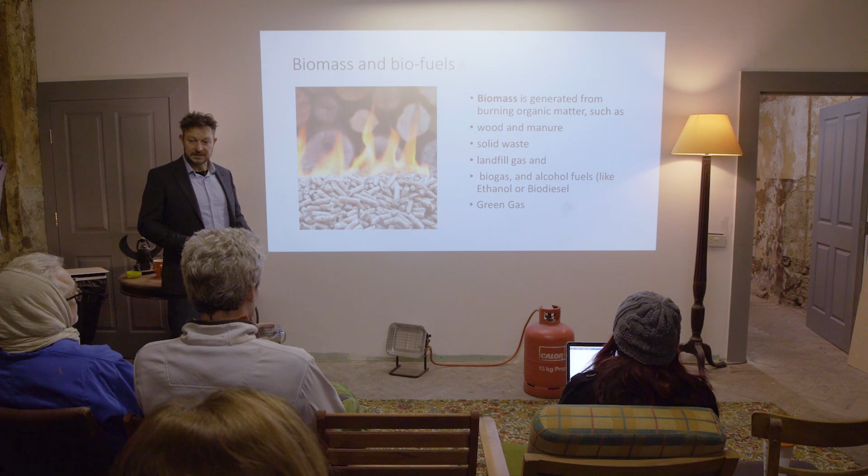One of the things is anything produces waste, it produces methane, or it produces carbon dioxide. It's part of a carbon cycle. It's claimed to be carbon neutral. In the olden days, the whole world was carbon neutral - people would chop down a tree, light a fire, cook, and a couple of years later, 20 or 30 years later, a tree grows back and they cut it down again.

Now we've got a huge population in the world. We haven't got enough trees, we haven't got enough biomass - it's not the answer. In this country, some power stations like Drax converted to biomass, and they were actually importing wood from America. A lot of the wood they were importing turned out not to be as sustainable as they were claiming, and once you work out the true carbon cost, it wasn't actually as green as people claimed. If used correctly with certain types of rotational crops, it can work brilliantly. If you do it wrong, it's adding to the problem of the environment.

Quite simply, you've got different wood fuels. You've got rubbish, which we use a lot of in this country - we're actually building more incinerators, which I'm totally opposed to. You've got alcoholic fuels, you've got crops - Miscanthus is a very fast rotational crop. In Zero Carbon Britain, produced by CAT, they talk about changing land use and using fast rotational crops, which seem to work quite well.

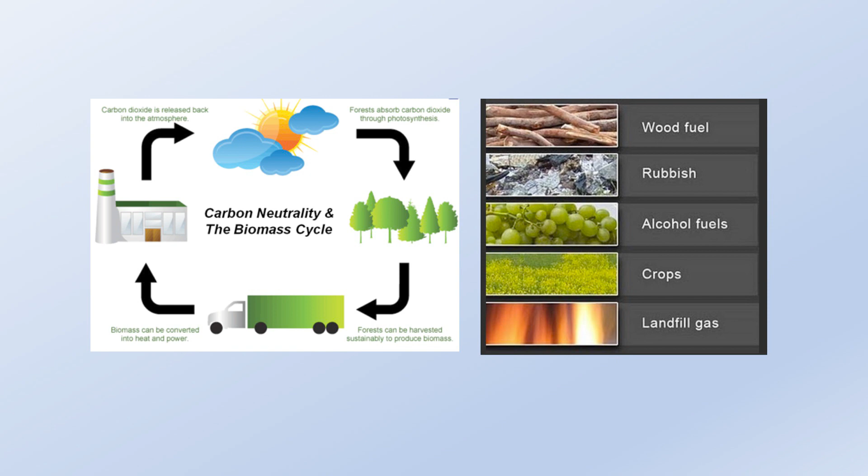Also you've got biogas produced by landfill and methane - they stick pipes down and extract the methane and burn it. Used correctly in a lot of countries, it's great because it gives off a vast amount of heat. You inject some air to the back of it, and it super burns the emissions, and then you can put scrubbers on the waste air coming out, which cleans it up as well. Done right, it's quite good. Not done correctly, it's absolutely awful.

In countries like Israel, it's actually compulsory to have solar thermal. You go to Greece or Spain, and they've got nice simple ones where they've got the collector and the tank sitting right beside it - nice and simple, it heats your hot water throughout the day, and then you get to use it. More modern ones, you can actually use these to preheat hot water for a heating system.

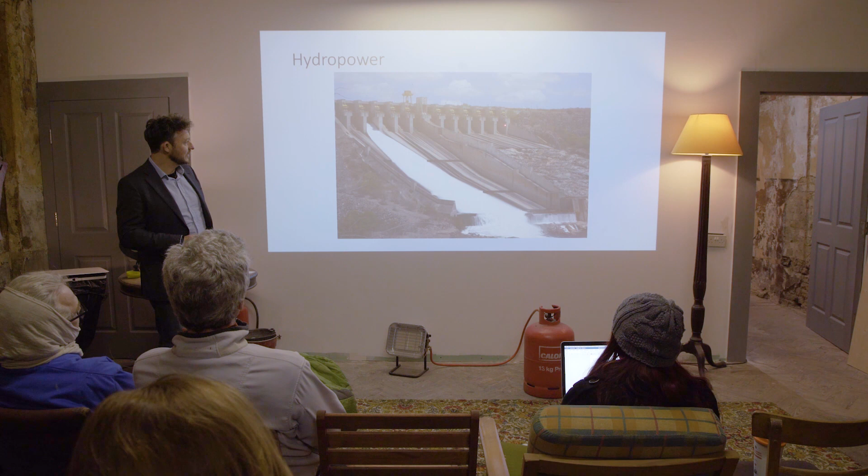This is a place I went to in Brazil - I think it's the second largest hydro plant. You can see all these units here, and only one of them is open. The reason being, this whole hydro plant damming the San Francisco River in northeast Brazil is running at 22% capacity because of drought. In Brazil, they're having huge energy problems because of changing rainfall patterns, and they've relied so much on hydro that it's now proving unreliable.

But once they're up and running, they produce a vast amount of energy, but also a vast amount of problems. How it works is quite simple - you've got three different types. One is you dam the water, physically block it, it builds up an artificial lake, and then you've got a controller you can open and close. The intake comes in with the pressure of water, goes into a turbine, and drives a big massive generator.

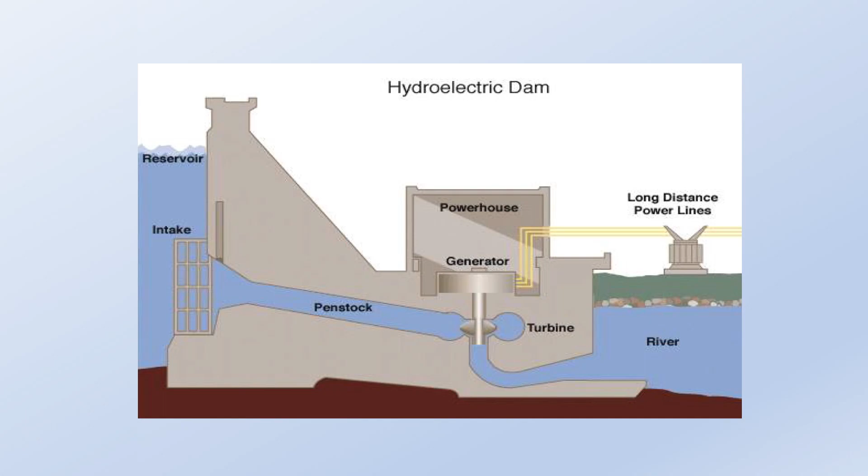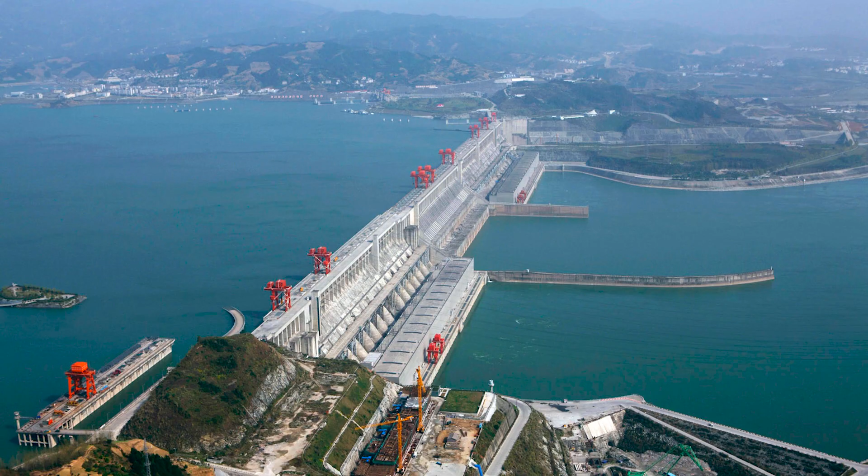These turbines can be 3 to 5 meters across, absolutely huge, and they produce a vast amount of energy. The biggest power plant in the world is the Three Gorges Dam in China. It's so big that they had to rehouse over 1 million people.

Vast amount of destruction. It dams so much water that it has actually slowed down the rotation of the Earth by about a nanosecond - it's like an ice skater. When an ice skater is spinning with their hands out, they go slow, and when they pull their hands in, they go quicker. So literally they've shifted that much water that it's affected the Earth's rotation.

So you've got three different types: impounded, run-of-the-river, and pumped storage are the main three. And then you've also got micro hydro, which actually works quite well on small rivers.

A big problem with hydro - if you've got a drought, they're not going to work very well. There's also huge environmental damage in hot regions because dammed water stops debris and silt from moving, and it builds up. This forms methane - a vast amount of methane is actually released from hydro plants, so much so that the IPCC is going to change how it accounts for hydro, which is why it's counted differently to other renewable technologies. There's also huge damage to fish stock and population.

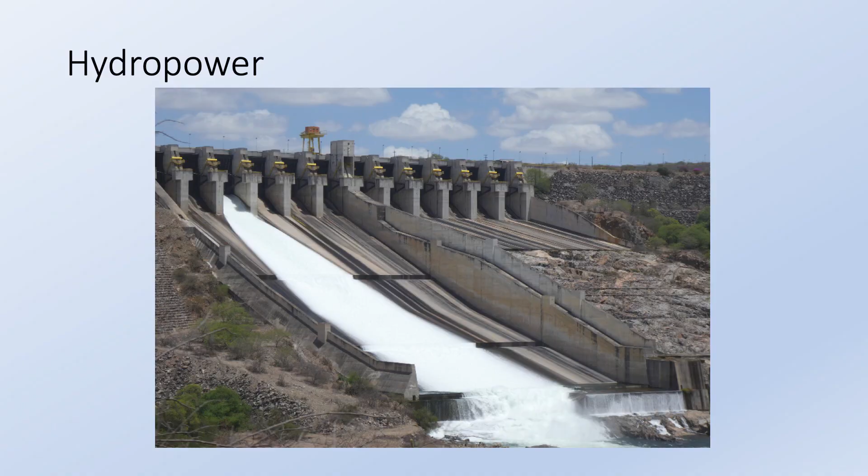And then there's the building of it as well - some of the latest dams Brazil wants to build involve literally destroying vast areas of pristine rainforest and using vast amounts of concrete. Amazing technology - it produces more renewable energy at the moment than any other technology in the world, but we're still coming of age in how we actually use it.

The preferred technology is run-of-the-river, where you don't dam a whole river. Instead, you dam or siphon off a part of it and redirect that to generate electricity without upsetting the rest of the river flow.

Tidal energy - absolutely amazing.

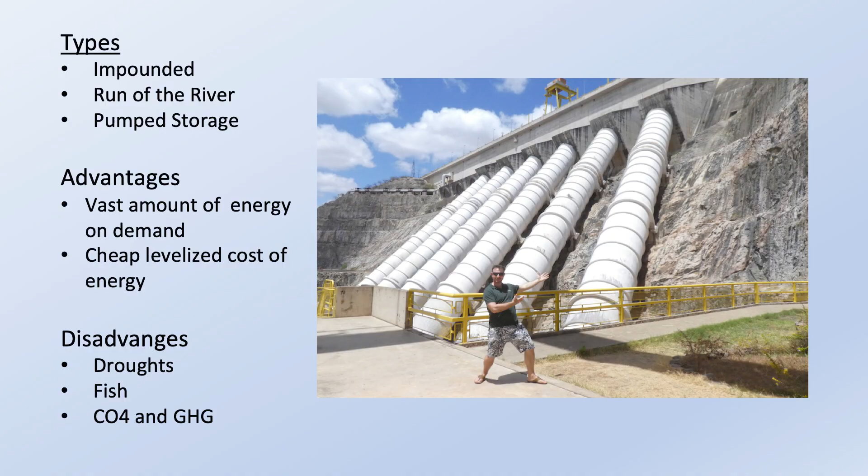Every day the tides rise and fall in this country and everywhere around the world. It's predictable, moving vast amounts of energy. Seawater is 832 times denser than air, so it's got over 800 times more energy in it.

With tidal, you've got 3 different types. You've got tidal streams, which is very similar to hydro, same types of turbines. You've got tidal barrages, and then you've got tidal lagoons.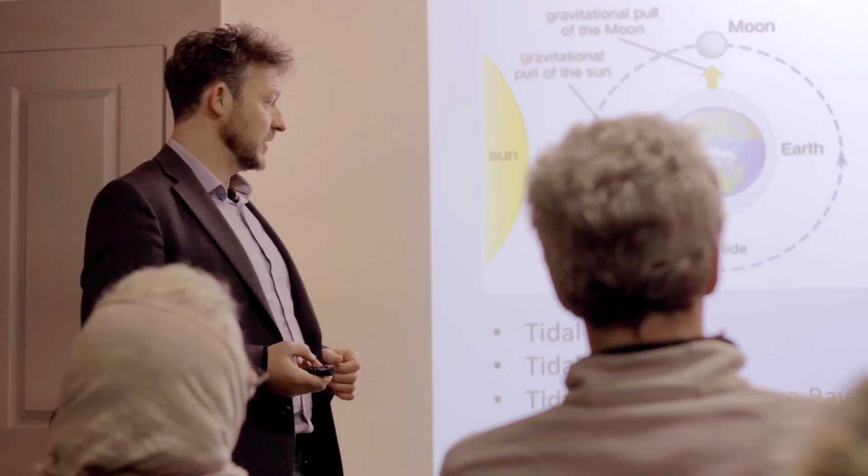A tidal lagoon, you might have heard of Swansea Bay. Every couple of years, they talk about putting a tidal lagoon in Swansea Bay. It got voted down again, saying it's too expensive and too environmentally damaging. After doing a bit of reading about it, it's a little bit questionable, really. If you put one in Swansea Bay and Cardiff Bay, it would produce probably about 7-8% of the electrical needs for the next 120 years in the United Kingdom.

Vast amount of energy. It's predictable. You know when your tides are going to be. You get to produce energy 4 times a day, 2 tides going in, going out. And the United Kingdom, British Isles, which also has Ireland, has the 2nd highest tidal range in the world at 14 metres in Swansea Bay, which is astronomical, really.

So if you can dam that, or siphon off some of the energy from it, it's a vast amount of energy. The payback time is so great. Within the first 6 months, it's actually paid for all the embedded energy for the next 120 years. So in terms of energy payback, you cannot get much better than tidal lagoons.

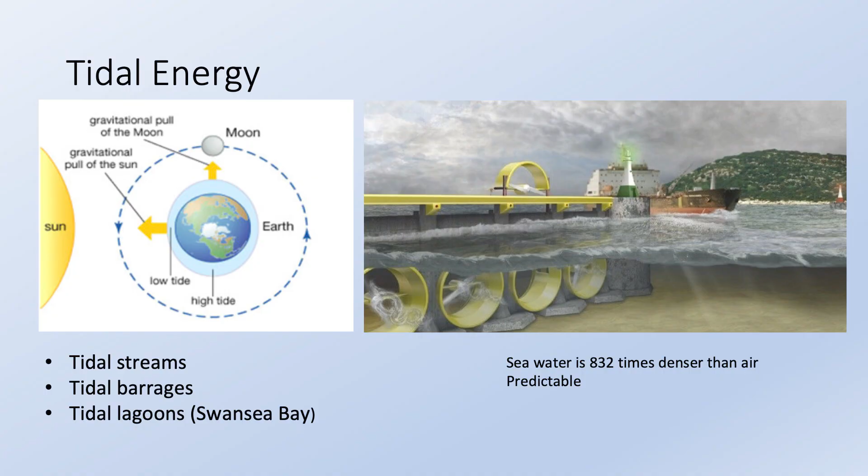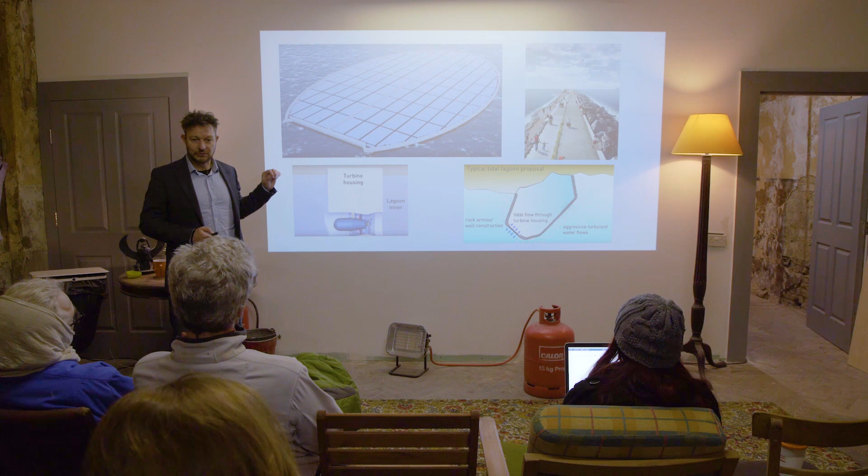So these are some of the different designs we've got going on here. You can actually go and create an artificial lagoon. Then what you do is you put in turbines that control the flow of water going in and out twice a day, so 4 times a day producing energy. Moving to the future, you can even cover the whole lot with solar panels. And if you have standalone units, you can split them so you can repair them at different times. This is a typical tidal lagoon proposal.

I think there's about 6 areas in the UK they're looking at putting these. But again, it got shelved by the British government because they said the energy was too expensive, and it comes down to what's called the strike price - how much you pay per unit of kilowatt or megawatt of electricity. To give you an idea, the government said it was £150 per megawatt strike price, which is very high. But if you average it out over 60 or 120 years, the actual price comes down quite a lot. So it depends on which way the accounting was going.

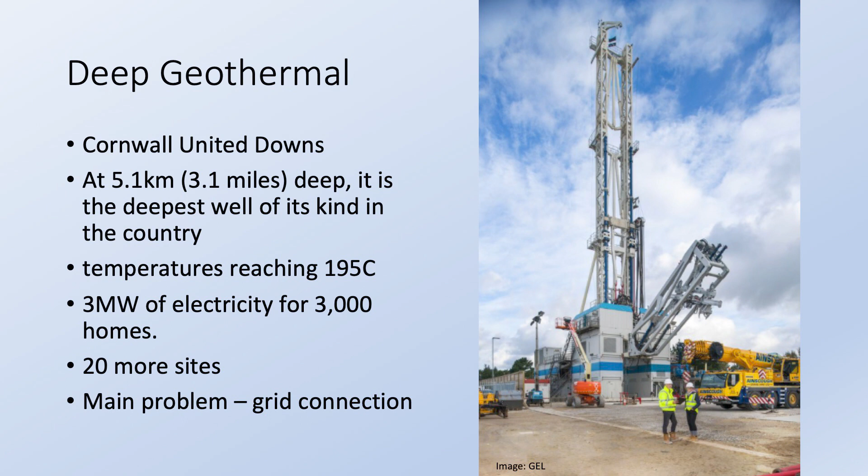Deep geothermal. In Cornwall, they're starting to use deep geothermal, which is you get a giant drill and you just keep on drilling down 3 or 4 kilometres. Then you put pipes down, you put water down, and the water comes back up with its temperature raised, and you use superheated water to power turbines. Very simple. The hard part is actually the drilling down and the engineering that goes into it. Once it's up and running, it's a fantastic amount of energy you can get from the ground, but there's only certain places you can use this type of technology.

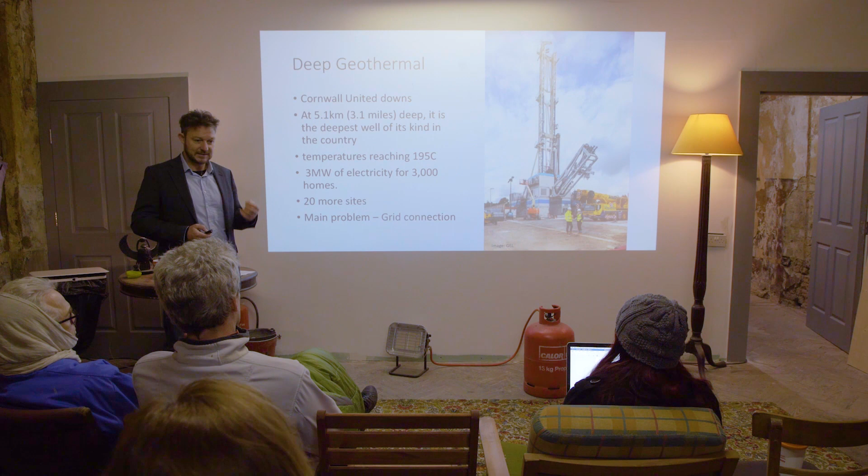So it has to have a certain type of rock, and certain characteristics, for you to actually use deep geothermal. Where deep geothermal is used quite a lot is Iceland, New Zealand, Indonesia, Japan - anywhere where there's volcanic activity close to the surface. But again, there's only a certain amount of energy you can get out, because even that needs to replenish its heat.

And in the future, smart grids. All this intermittent energy that we're going to be producing, what we need to do is balance it with our energy needs. So on a very simplistic level, we've got things called microgrids. You start putting them in Africa, where you have a school, a community, 5-10 houses, and what you do is put in a solar PV system and a battery storage system and a small wind turbine, and all the energy you get, you use. When you run out of energy, you have some in your battery, and when you run out of that, you have a couple of hours with the lights off.

Moving to the future, smart grid, what you're going to do is look at all the electrical appliances you have in your house. You've got things you don't use very often, like your fridge freezer, which you might open maybe once a day or once a week. Your fridge you open maybe 3-4 times a day. So you've got these electrical appliances in your house that you don't actually have to run all the time.

Soon we're going to have these big, huge batteries attached to houses that we don't need to have running all the time, which are going to be electrical vehicles that draw down a vast amount of energy. And then we're also going to have computer screens and all these different things we use on a daily basis. The smart grid talks to each other and figures out energy use.

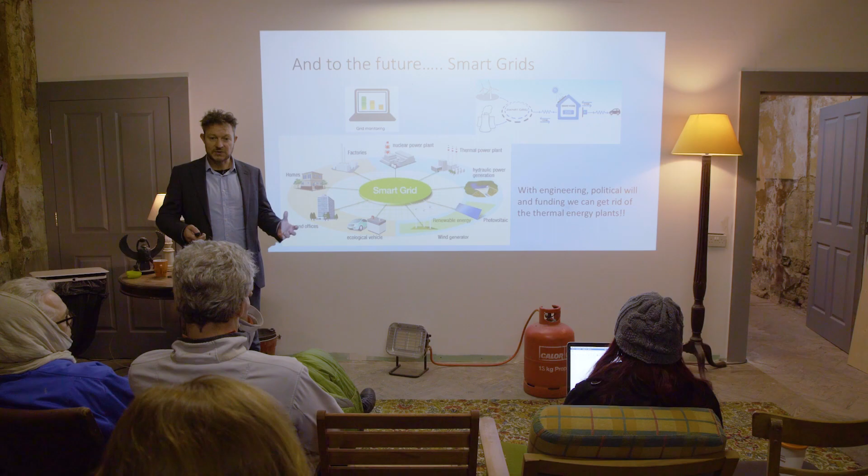This is where computer whiz kids come in. Here we've got solar, you've got wind, and then it's going into your smart home with the micro electricity that you're generating yourself. You've got it plugged into your smart car, everything's talking to each other. So this is the whole concept of a smart grid. And you tie it into interconnectors with different countries, going from a national grid to an international grid, and then you're starting to create kind of super grids. This is where we're moving in the future. If we can crack battery storage, or storage of energy, this will work quite well.

Again, it drives turbines, which creates electricity. The disadvantage is you can't switch them on and off. You've got problems with nuclear waste, problems of actually getting enough uranium, and you've got the build cost. So everything has a plus and a minus to it.

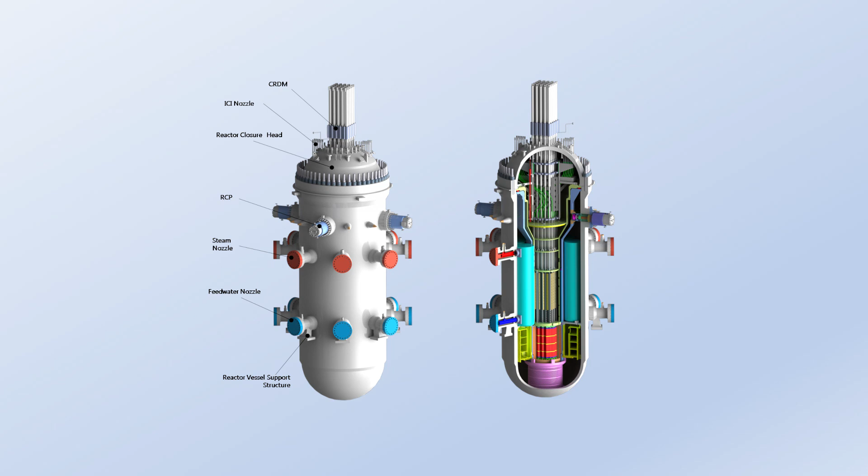The governments here in the UK, all the future plans rely very heavily on nuclear. A lot of nuclear plants are going to be decommissioned, and there are a lot of plans to build a lot more nuclear. There are even plans in place to build small modular nuclear reactors, kind of like the reactors you get in nuclear submarines and nuclear ships, and you can have them in towns and cities around the country.

So that's one technology looking at the future - this is uranium, third generation. The ones of the future, we could have thorium, which has a lot of added benefits and is a lot safer, except we haven't cracked that technology yet. I think we're about 10, 15, maybe 20 years away from thorium reactors. So there's a big question about nuclear - if you get rid of it, what are you going to replace it with is pretty much the question.

Carbon capture and storage - I call this the unicorn technology. Our fourth and fifth carbon budget in the United Kingdom is all based on carbon capture and storage technology. The reason we're still extracting fossil fuels is because of carbon capture and storage technology. I think it's 1.7 trillion since the Paris Accord has been signed that has been put into extraction of fossil fuels.

What they're claiming is that we're moving towards using carbon capture and storage technology so we can continue burning fossil fuels. There's only a couple of plants around the world that they've tried it on. It does work, but they haven't tried it at scale. It's very, very expensive to do.

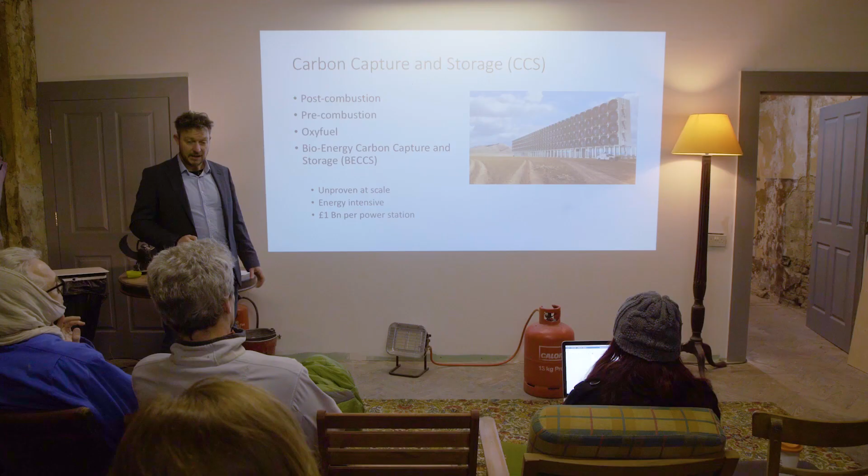There are three main types: post-combustion, pre-combustion, and oxy-fuel. I don't know too much about it, but one's extracting the carbon before you burn it, the other one's extracting the carbon after you burn it, and the other one's using some kind of oxygen process to burn it at a different rate.

Again, our whole future is actually relying on this technology. So airport expansion—the reason we say we're going to reach zero carbon by 2050 is because of carbon capture and storage. I'm not an expert on it, I can't comment too much, but from just reading about it, it sounds like too much to put the future of the world into technology that hasn't been proven at scale that's actually needed. The actual cost of retrofitting all our thermal plants is about £1 billion per plant.

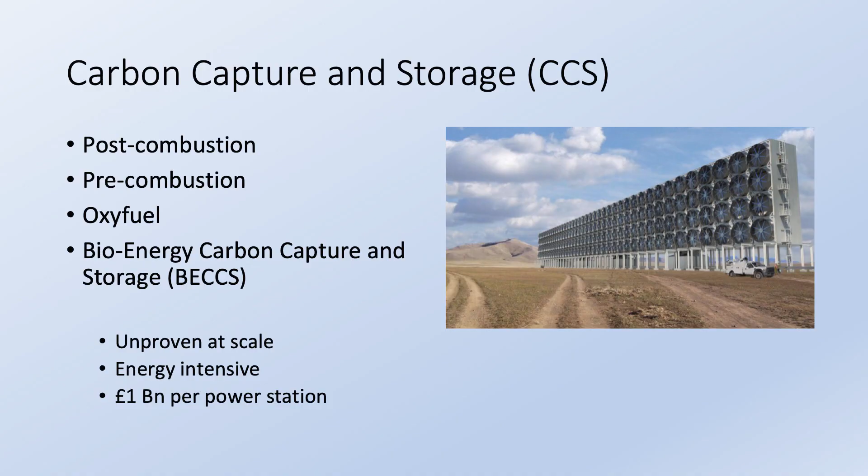So it's very expensive, and it uses a vast amount of energy. The other one we're looking at is bioenergy carbon capture and storage. This involves using fast-growing crops, and again a process of extracting the energy, changing it into a biofuel or synthetic fuel, burning it, and then burying some of the excess carbon. I don't know too much about it, but I do know it's unproven at scale, and we're relying very heavily on this in the future. So it's something to be aware of and become opinionated about.

I'm coming towards the end now, where we start tying everything together. This here is from our friends at the Business Energy Industrial Strategy, looking at the future costs of energy. What we've got here are our main renewable sources in the UK—onshore wind, offshore wind, and large-scale solar. Then we've got our traditional fossil fuels, and then nuclear.

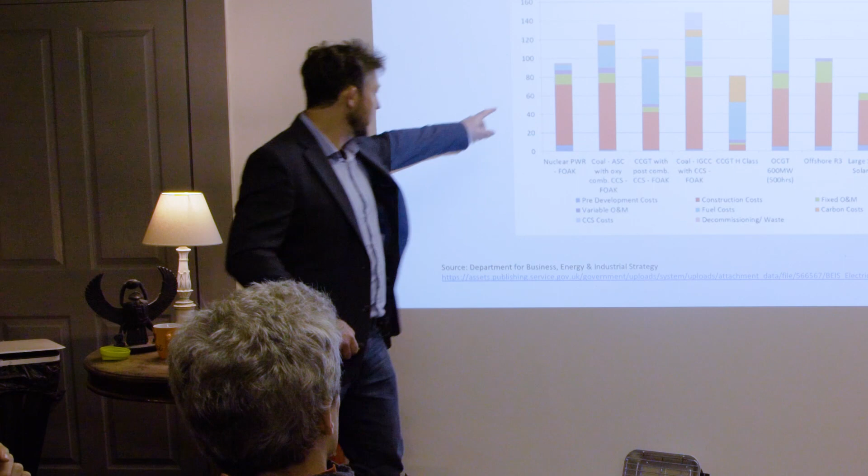Blue is the development cost—the pre-development cost of designing a system. Pink is the O&M, what it actually takes to run the system. Then you've got fuel costs, construction costs, decommissioning—so it's the full life cycle cost of a plant. You work out everything from concept, to building it, to putting energy in to run it, to decommissioning it and starting again. You end up with this, called the levelized cost of energy, which is a very good way of comparing different energy sources.

So what you can see here, quite simply, is that renewable sources are actually cheaper. This is a big, major game changer—fossil fuels are now more expensive than renewable energy, and we've never had this before. We've always relied on subsidies. As solar gets cheaper, its levelized cost will reduce, along with offshore wind. Once interconnectors are in place, the price tumbles down further.

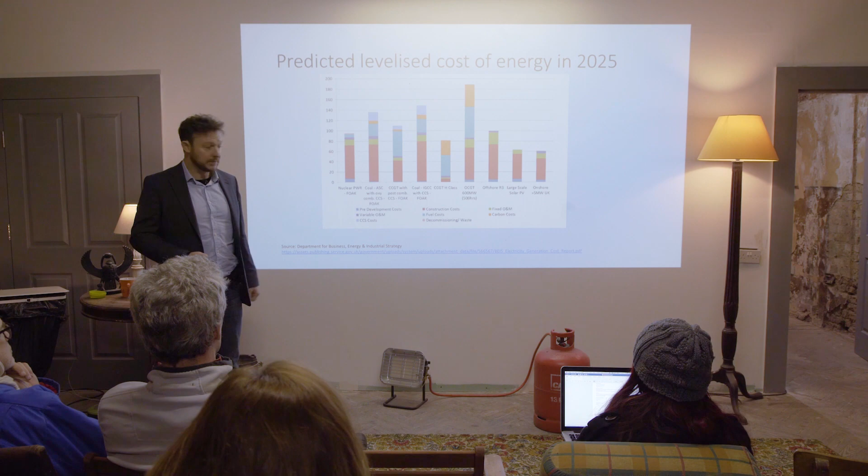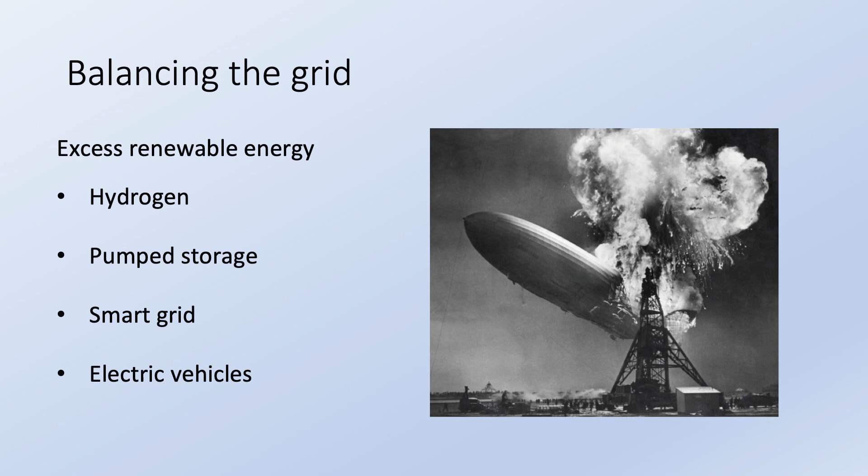One other game changer we're going to have is hydrogen. Everything comes down to balancing the grid. With an intermittent energy supply, if you overproduce wind and overproduce solar, you need somewhere for that excess energy to go—such as pump storage systems, smart grids, electric vehicles—but I think the future relies a lot on hydrogen.

You can use that excess energy through electrolysis to split water and produce hydrogen that you can store. Once stored, you can use it in the future to produce energy, and you can also use it for driving cars, heavy goods vehicles, vans, and trucks. So it's definitely a technology of the future. By combining intermittent renewable supply, pump storage, hydrogen, and a smart grid, we can actually achieve 100% renewable energy to run the country.